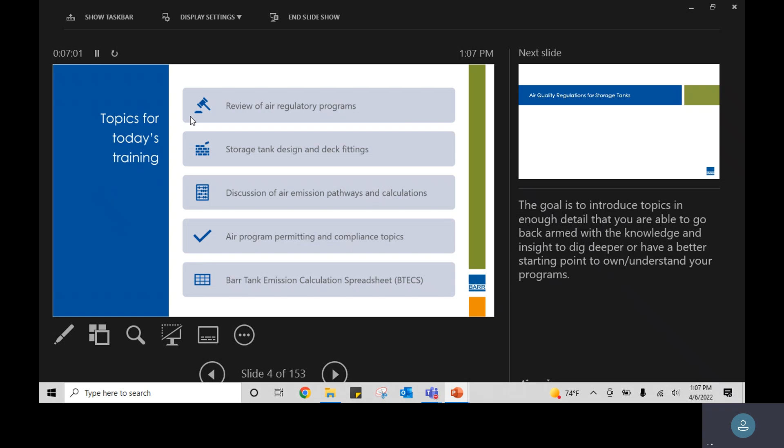So we'll start with a review of the regulatory programs that govern, surround, and impact our storage tanks. We'll talk about storage tank design and deck fittings, dive into the calculations and emission pathways, talk about some permitting and compliance topics, best practices, et cetera. Then to close it out, on the Barr side, we have developed a replacement for TANKS 4.09d, a spreadsheet-based tool to do the latest and greatest AP-42 calculations, and we have that as a resource available to folks if it's something they're interested in. So we'll touch on that quick.

So we'll get started, dive in, and get the regulatory stuff out of the way first. That helps build the foundation for why tanks are designed the way they are and influences the emission calculations as well. So the fun starting point is: are we talking about a tank or a vessel? And what does that mean?

As much of a lay definition or synonym as they may be, that can have significant ramifications regarding the regulatory applicability of programs. We'll get into some of those, but it's important to always read the definitions, understand your regulatory programs, and look for those exemptions.

If it looks like a tank and smells like a tank, it might not be a tank though, if it's a pressure tank or a frac tank. Frac tanks are always curious because they are not subject to NSPS KB, since they have wheels, and as long as you don't leave them in place for 12 months, they're not a stationary source. However, depending on your facility operation and activities, those emissions you still can't ignore. So you may not have a regulatory burden for your frac tanks, but it's still important to understand what those emissions are and what they're being used for.

So anyway, we should always be thinking about, is what we're talking about covered by these regulations. That's the on-ramp to understanding if there's applicability or not.

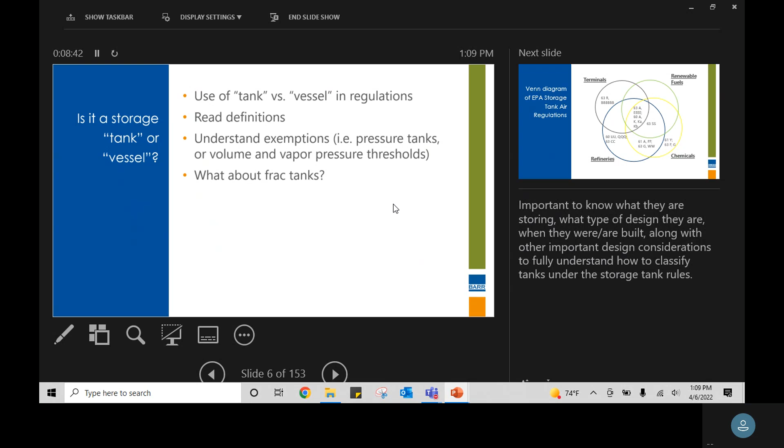From the federal perspective, the rules that cover storage tanks create a very messy Venn diagram. If we look at the different sectors we all seem to operate in, there's a pretty good representation across the board. There's overlap between terminals, renewable fuels, chemical manufacturing, and refineries, particularly from the NSPS perspective, because that's talking about tanks based on size, construction date, and vapor pressure.

And some of the other chemical manufacturing rules, but then there are some terminal-specific rules that deal more with loading operations, and other rules that have more specific refinery impacts for benzene or refinery MACT rules and things like that.

Suffice it to say, tank regulations aren't complex at face value, but as you begin to have overlapping regulatory applicability, there's a need to understand your overlap provisions and whether there are exemptions for being subject to one program or another. Applicability may not be hard for a single program, but it's important to understand where your coverage lies across all applicable potential regulations.

That being said, from the most common perspective, when we think about storage tanks, it tends to be NSPS KB. That's broadly the most applicable standard and does a pretty good job of walking through the standard regulatory requirements for floating roof storage tanks and tanks in general. We'll use KB as kind of a guiding standard to talk through inspections, record keeping, reporting, things like that throughout the presentation here today. But KB is not the only rule that has potential storage tank requirements or standards.

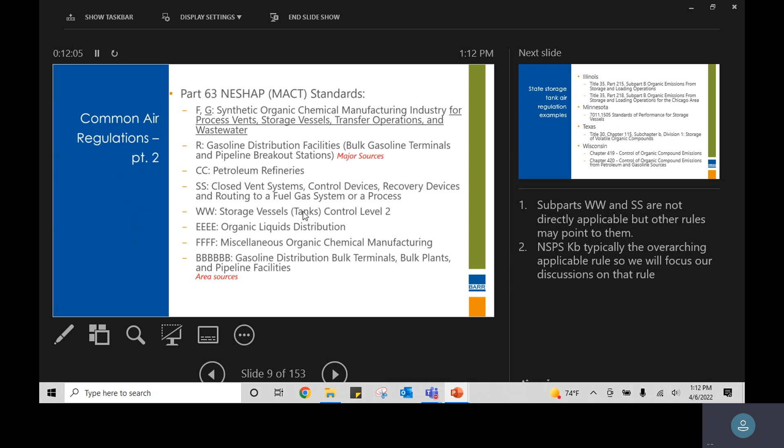And of course, that was all just to talk about the federal level regulations. We can then dive a layer further into our state-specific rules. I am from Minnesota, and Minnesota's air regulations for tanks have a lot of overlap with surrounding states, but there are also a lot of differences. What we often see isn't completely wholly different regulations, but there are some very unique things in different state regs. So let's see if we have a couple examples of that.

So a couple examples. Illinois has a specific standard for vapor pressure for tanks that aren't subject to KB, requiring less than 12.5 psi at a 70-degree reference temperature or something to that effect. So there's a bit of a lesser standard for tanks not subject to the federal rules. Other states like Indiana require your tanks to be painted white. Wisconsin also requires your tanks to be painted white. None of the federal rules have specific paint-related provisions, but those all exist.

Again, this is just a snapshot, not to scare but to inform everyone that, especially if you've got jurisdictions across the country, a lot of your tank stuff may be the same, but there are going to be a handful of nuances you may not expect or be aware of at first. So again, just providing some context and awareness.

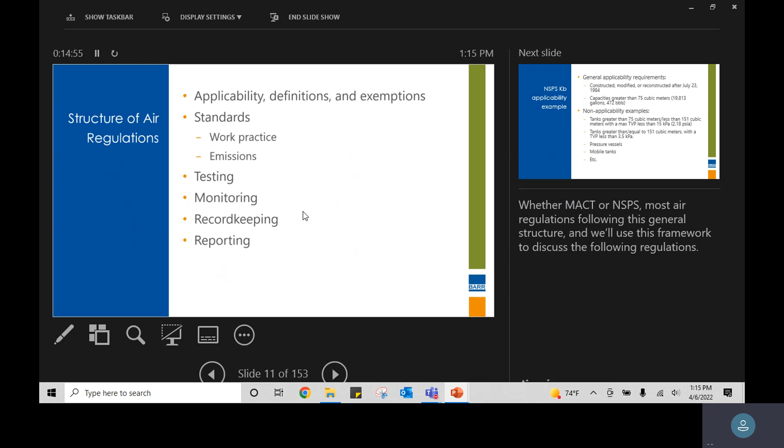And then we've got some testing, monitoring, record keeping, reporting. This is the pretty standard regulatory structure for any given rule, and we'll dive in and talk about tanks specifically. So again, we'll start with KB as a basis.

This is a good one because it has some interesting caveats as well. From an NSPS perspective, we're typically talking about specific pieces of equipment as opposed to whole industry segments like a MACT rule or some of the other rules. So for KB, for example, our general applicability requirements are based on when the tank was constructed, modified, or reconstructed, and its size. Non-applicable tanks would be certain ones that, if within a certain size range and storing less than a certain vapor pressure, or greater than a certain size with a slightly different vapor pressure threshold, don't have the same general applicability requirements as those primary tanks.

KB also has a number of exemptions for pressure vessels, mobile tanks like our frac tanks, and a number of other things based on the text in the rule. There are a handful of other exemptions that exist, but it's important to understand as we get started what fits in the box and what doesn't.

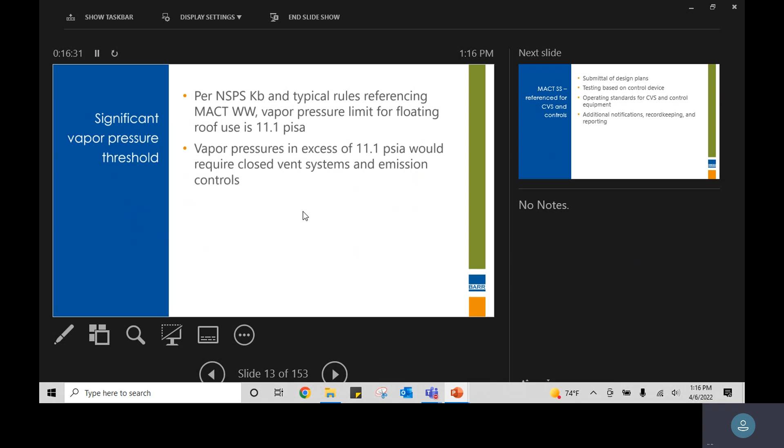The number we'll talk about a lot, whether we're talking about KB or MACT WW, is 11.1 psi for the true vapor pressure threshold. So if our tanks are below 11.1 psi, we can get by with a floating roof as the primary form of control. If we have tanks that exceed that 11.1 psi threshold, that becomes a situation where we need to install a closed vent system and have a control device.

So under KB, if we fall into that area where we have high vapor pressures, there are some additional requirements. The MACT SS has a pretty good example that covers this in more detail, where you have to submit design plans, there has to be some testing, operating standards for the closed vent system and control equipment, additional record keeping, notifications, and reporting for that control equipment. So if you can stay under 11.1 psi, that really creates typically the more straightforward operating scenarios when you don't have to deal with those control devices.

So some other sources of tank requirements beyond the state and federal regulations may be your existing air permits. There may be BACT limits that you take on as part of a project to limit or reduce emissions, to stay under certain significant thresholds, or simply as part of your BACT analysis, you have some additional limits or requirements for your tanks, for control equipment or things like that, that may be above and beyond your rules.

A few decades back, the Storage Tank Emission Reduction Partnership Program came into effect to help address the issue with slotted gauge poles and the issue with the 1/8 inch gap criteria. So that had some voluntary agreements to help control slotted gauge poles or guide poles. And that might be what's driving you to have additional controls on a tank that might not be otherwise subject to a specific standard.

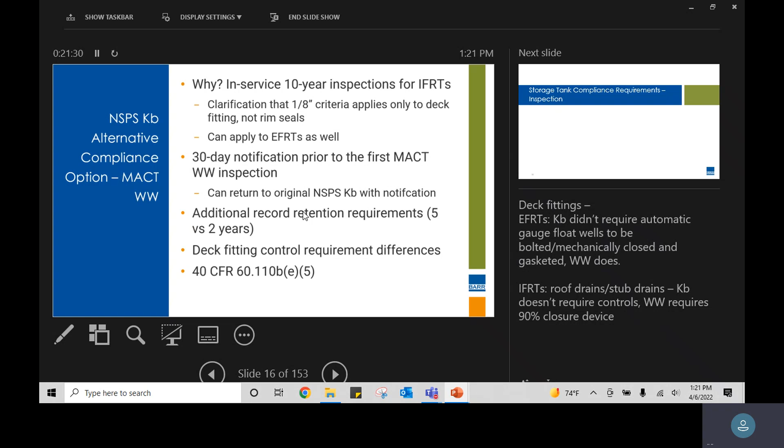Oh, so speaking of inspections, that unique caveat aside, we'll start talking through some of these inspection requirements that our tanks are subject to here. So we'll start again with covering what we look at from an internal floating roof perspective.

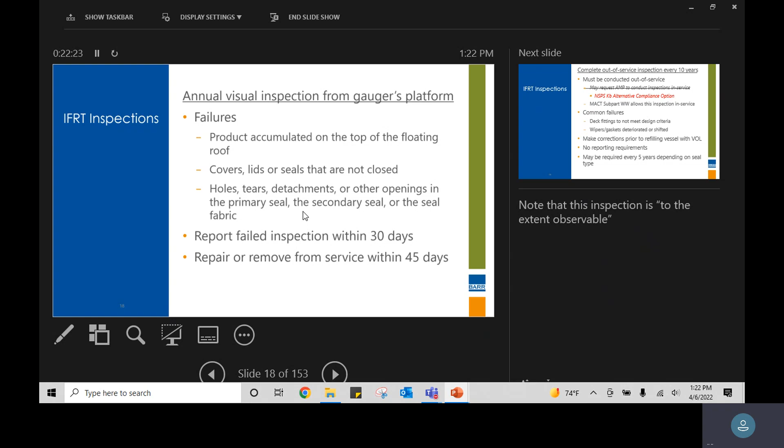I already spent some time covering the complete out-of-service inspection that's required every 10 years. Again, under KB, it must be completed out of service. However, we now have this alternative compliance option that may be a good fit for certain facilities, depending on their safety plans and procedures. And MACT WW—if you have a refinery and are subject to MACT CC and ultimately MACT WW—you now have the coverage to do that in service as is.

So common failures or common issues that we see with these out of service inspections or the 10-year inspections: you may have deck fittings that don't have the necessary controls, or you're missing gaskets, wipers, or other required controls, or they may have deteriorated or worn out and need to be fixed and replaced before the tank goes back into service. You have to fix and repair them before they return to service.

There aren't any reporting requirements for the out of service inspection as it is. If we begin to do them in service, though, then we end up with similar reporting issues and have to fix them within 45 days, or have to take the tank out of service. Certain tanks, depending on their rim seal configuration, may require these inspections on a 5-year basis, but most of the internal float and roof tanks that I'm familiar with typically have the mechanical shoe configuration and are on the 10-year schedule.

So then shifting to the EFRT perspective, we don't have to measure seal gaps on covered float and roof tanks, but for external float and roof tanks, we do measure on a 5-year basis for the primary rim seals, and on an annual basis, the secondary seals, measuring for gaps that exceed certain criteria based on the tank size and diameter.

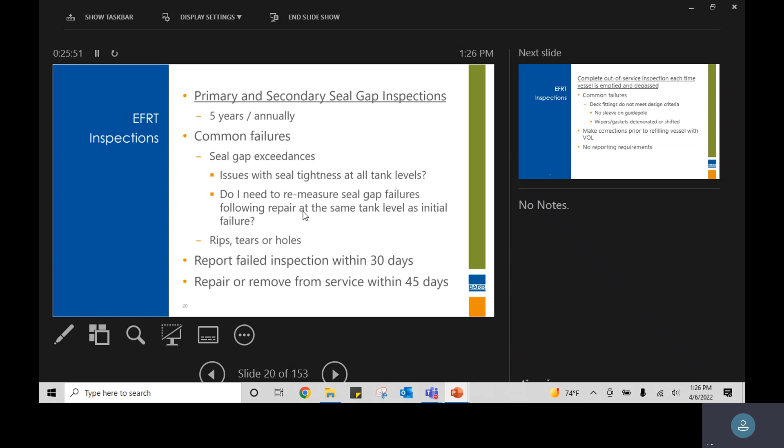Again, for these types of failures, there's a 30-day report notification, and then you have to repair them within 45 days as well. Unlike the IFRTs, we have a requirement to do a complete out-of-service inspection anytime this type of tank or vessel is emptied and degassed. So this is that same inspection criteria as the 10-year IFRT inspection, but for EFRTs, we have the luxury of being able to do it only whenever the tank is emptied and degassed. There's not a corresponding time scale with that one.

So again, deck fittings not meeting the design criteria. Another common one we see here is there's not a sleeve or appropriate control on those slotted gauge poles or guide poles. Oftentimes too, wipers and gaskets will deteriorate over time. They get repaired as part of the API 653 process. Again, have to make the corrections before refilling with volatile organic liquids. And there aren't specific reporting requirements here as well.

So then what do we do if we have inspections, if changing products stored in the tank? If we're talking about things from a refinery perspective and you're potentially changing something from a high volatility material that would keep you as a Group 1 storage vessel under a MACT rule, and you're changing to a diesel fuel or something that's a lower RVP and may not have the same requirements, you may, from a federal rule perspective, be in the clear, but if your air permit still says you shall do these inspections for this type of tank, even if the material has changed, you still may need to conduct those inspections because they're in your air permit.

Okay, so we talked about inspections. We'll jump into monitoring and record keeping for tanks. It's pretty straightforward. The big one is understanding what your tanks are and then what the changes are to them if those changes occur. So KB specifically requires that you maintain records showing the dimension of the vessel and analysis of the capacity of the storage vessel. You need to know what you're storing in there, what the period of storage is, and what the maximum true vapor pressure is during that respective storage period. So again, we want to know how big they are for applicability purposes and when they were built and are they designed correctly.

What is in the tank to do that maximum true vapor pressure test to understand - do I need a closed vent system and control device? If that vapor pressure is going to change and exceed a threshold, you've got 30 days to notify the administrator, and then potentially, depending on what that vapor pressure change is, you'll need to look into those potential additional requirements that may exist. And then for KB purposes, record retention is typically for 2 years. But in the case of dimension of the storage vessels and things like that, those are for the life of the equipment.

So again, true vapor pressure is going to be a pretty significant concept, both from the regulatory side and as we move into the emission calculations as well. There's a couple different categories or approaches to consider when we're talking about true vapor pressure. For crude oils, typically, historically, we've relied on RVP data and the API nomographs to get from RVP to our true vapor pressure. Other liquids, whether it's a pure chemical or things like that, there's standard reference texts for that vapor pressure data. There's a host of ASTM methods for refined products.

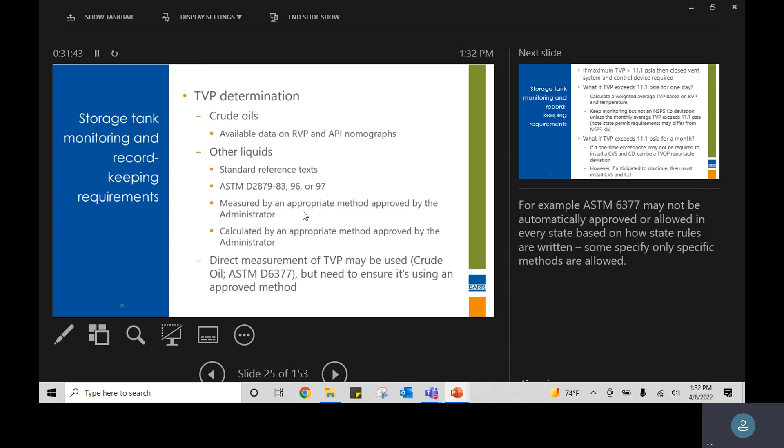So again, we've already talked about it a little bit - if the TVP, the true vapor pressure at the worst case product at your worst case monthly temperature exceeds that 11.1 psi threshold, you're going to need a control device and a closed vent system. The interesting thing from the storage tank KB rules is when we look at the definition for maximum true vapor pressure, they talk about things on a monthly temperature basis. So what happens if we exceed 11.1 psi for one day? That's not directly a KB deviation unless, using your monthly average temperature, you exceed that 11.1 psi threshold. So we have some latitude in the representation and definition of maximum true vapor pressure per NSPS KB rules.

If you're getting close to that 11.1 psi threshold for one day, though, that typically is an unfortunate harbinger of things to come, and you should be having discussions with your product quality groups, whether that's from a pipeline perspective or a refinery perspective, because it gets very difficult to turn knobs quickly to mitigate temperature, thermal issues, and high vapor pressure issues.

From a one-day perspective, it's a great check to have, a good thing to keep in mind. It can ring a bell. But if you have that TVP exceedance for a month, that's when you're exceeding the definition of that maximum true vapor pressure. A one-time exceedance, and a quick caveat: your mileage may vary.

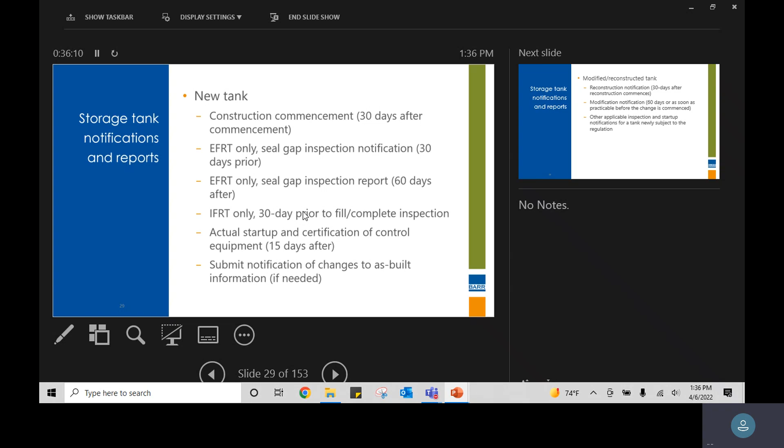So another key thing to note too, from the NSPS perspective, is if your tank is not subject to NSPS KB, we have to be considerate of whether any maintenance projects or construction projects or changes at the facility are going to impact our non-KB tanks. And is that going to trigger NSPS KB applicability by way of reconstruction or modification?

Under Subpart A, there's different requirements for when a modification or reconstruction notification has to be submitted. Also, if you do modify or reconstruct a tank and you have newly applicable NSPS, if you have a tank that becomes newly subject to an NSPS standard, depending on your state, just that on-paper change of becoming subject to a new regulation may mean you also have to go through permitting as well.

So it's important to understand the as-built and as-found condition of your tank and how those changes may impact your regulatory applicability for the tank.

So what about if you're on a tank for a tour with some new folks at your facility, and you see a 6 foot by 10 foot pool of crude oil on your tank roof? It's not your annual seal gap inspection. It's not your annual IFRT visual inspection.

What do you do? For NSPS KB, it's pretty straightforward to follow that 45-day repair window and notification situation. If it's not a KB tank, you may need to check your state rules to see if they have any specific programmatic requirements for addressing issues. You may have some permit requirements as well, again, outside of those regulations.

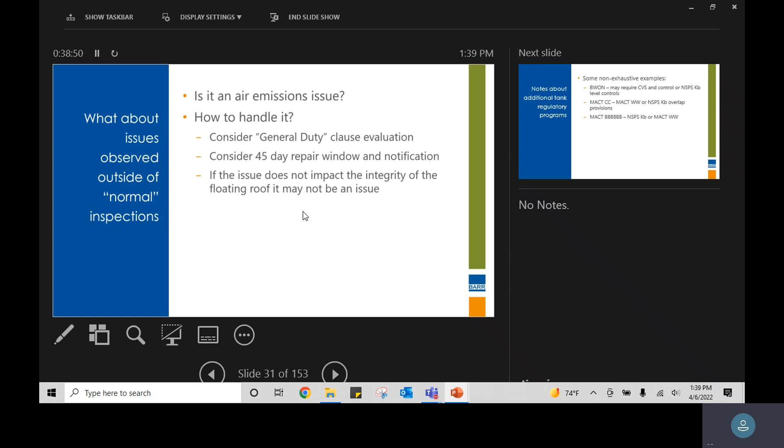A couple other notes - you may remember that very messy, terrible Venn diagram. BWON, MACT CC, and MACT 6B all have some sort of overlap provisions that allow us to look at other regulations, primarily KB, as a way to demonstrate compliance, or if we're subject to KB, rely on that as well. So it becomes a little bit of overlapping spheres of regulations to be mindful of as you evaluate your tank program. Just be mindful there's not just one regulation to consider, depending on the operations you have.

Now we'll get a little out of the esoteric regulatory background and look at what's required on our tanks. An important thing we often see helping clients deal with tank issues is, from the environmental perspective, we have a vocabulary list from NSPS KB that's aligned with AP 42, Chapter 7.1 for emission calculation purposes. We might call certain deck fittings certain things, but our tanks group and folks in the field have different terminology and meanings, so there can be some disconnect. It's important that from the environmental side we understand what's required, and from the operational, physical tank perspective, the folks doing the work are on the same page, regardless of whether we call it a vacuum breaker or a bleeder vent.

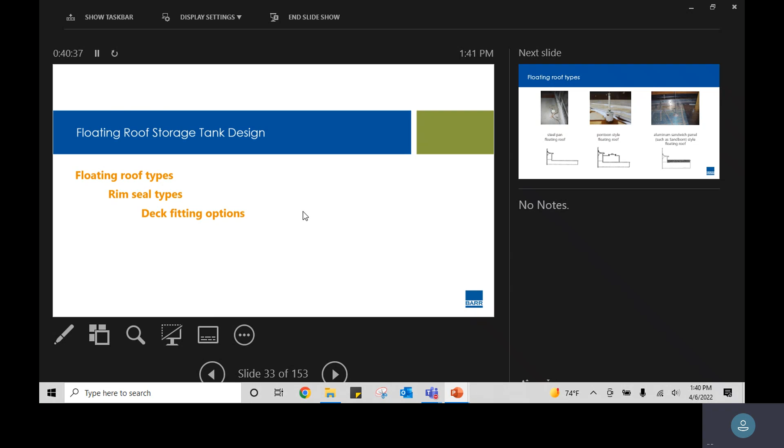So we're looking at floating roofs first - there's a couple different types, and we've got figures from AP 42 to help characterize that. Typically in internal style floating roof tanks we'll see the pan style floating roof - a thin layer of steel with an upturned edge that floats on the liquid. We don't typically see the pan style roof on EFRTs because rain, snow, and precipitation cause significant buoyancy issues and cause those to sink fairly commonly.

More often for external style floating roof tanks, we'll see the pontoon style, which has the annular ring of enclosed pontoons around the exterior perimeter of the roof that help provide stability and flotation. We can also see on internal floating roofs an aluminum sandwich panel style - I believe the trade name is Sanborn style floating roof. That's a thin layer of aluminum, some foam, and another layer of aluminum that floats on the roof. It has a little more rigidity than a steel pan, but not much. It also has some deck seam issues we'll talk about, but it's another somewhat common internal floating roof style.

We've talked about pontoons from an EFRT perspective. There can also be an aluminum skin and pontoon style floating roof on internal floating roof tanks, more like a traditional pontoon boat - it's got the pontoon on the underside of the roof. There's a roof leg, pontoons that sit on the liquid, and actually a vapor space between the liquid surface and the floating roof itself.

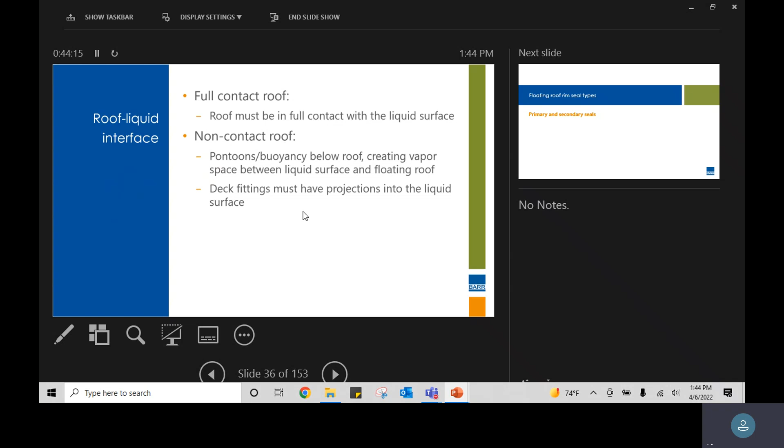So the floating roof's main goal is to minimize the available vapor space between the liquid surface and the floating roof or the atmosphere. If we have a roof where the floating roof isn't touching the liquid, we have a vapor space where VOC concentration can build up and more readily leak or evaporate into the atmosphere. So to address that, you have to have a projection below the roof or below the liquid level. I've got a couple pictures of that coming up here.

So we talked about the types of roofs. Now we can look at the primary and secondary seals that are used to close off the liquid surface from the atmosphere. For EFRTs, we have typically a primary seal and a secondary seal, and that's required under KB to have a primary and secondary seal.

We'll most commonly see mechanical shoe seals. There may be some liquid mounted seals, and we'll have a few examples of those coming up here. The secondary seal effectively closes off or covers that primary seal space, so you have a second layer of protection against evaporation losses from your rim seals.

For internal floating roof tanks or external floating roof tanks that have a dome on them, from the KB perspective, you've got a couple options. You can have a liquid mounted foam or a liquid filled seal. That is, I've heard it best described as a fancy pool noodle wrapped in a resilient film that allows for a little bit of flexibility as the roof goes up and down.

The challenge with those is if your film covering gets ripped or torn, your foam seal can then soak up a whole pile of gasoline or other very flammable or volatile material, and we end up with some pretty significant concerns around safety and/or fire or combustion issues.

And then you can have two seals mounted above each other or a mechanical shoe seal. So for covered floating roof tanks, you may run into a situation where you just need a primary seal to comply with your regulations, but there may be BACT or other air quality program drivers that push you to have more than just a primary seal, or you may elect to take one on as an emission reduction activity as well. So what do these look like?

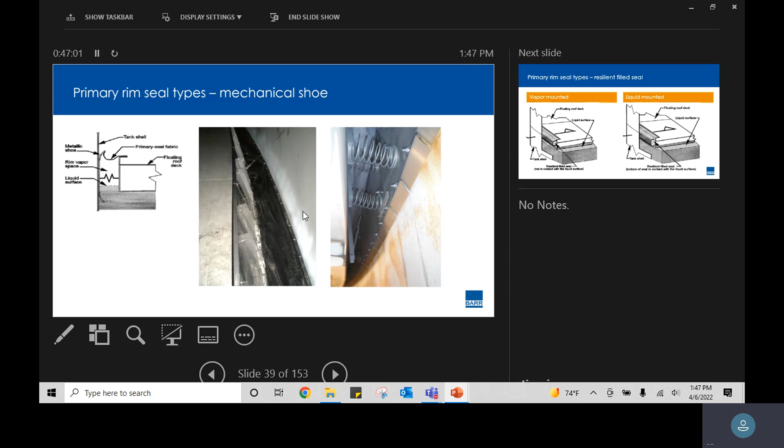In addition to that seal or shoe closing off the space, we'll have a primary seal fabric here that again has the ability to flex as that roof moves up and down. You can see here it's this dark black fabric material that runs along the perimeter of the rim seal. And from underneath, there's typically a combination of springs and other tension mechanisms to keep the mechanical shoe seal flush against the tank shell. So then I mentioned there can be resilient filled seals.

There can be both a liquid or vapor mounted seal approach. And again, when we get to the emission calculations side of things too, we'll see there are some differences in how these seals not just act as a design criteria, but also impact our coefficients for emission calculations. So vapor mounted simply means that the seal is not in direct contact with the liquid, and liquid mounted means that seal is flush against the liquid surface as the tank operates and moves up and down.

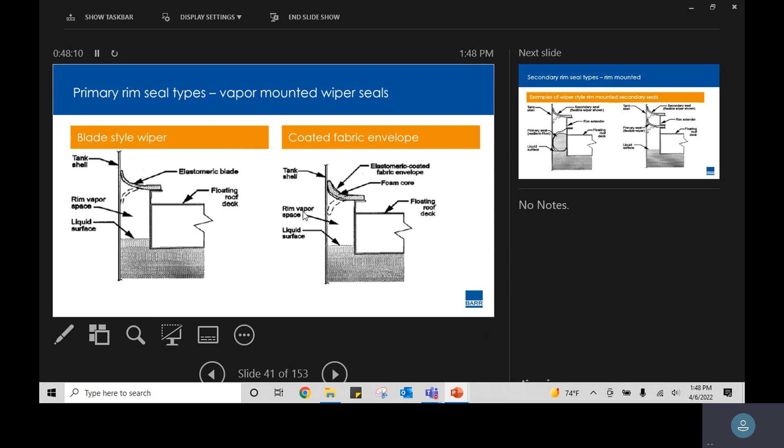So back to the internal floating roof type of tank, we can have a vapor mounted blade or wiper type seal, which is essentially a squeegee that flexes as the tank roof moves up and down. It can be either more of an elastomeric blade or a foam core coated type seal. Different manufacturers have different technologies and techniques, but at the end of the day, a wiper seal is a wiper seal.

Most commonly though, I think, by a quick show of hands, who has mostly mechanical shoe seals on their floating roofs? Yeah, I think overwhelmingly for the general industry, we see mechanical shoe seals as the primary seal configuration.

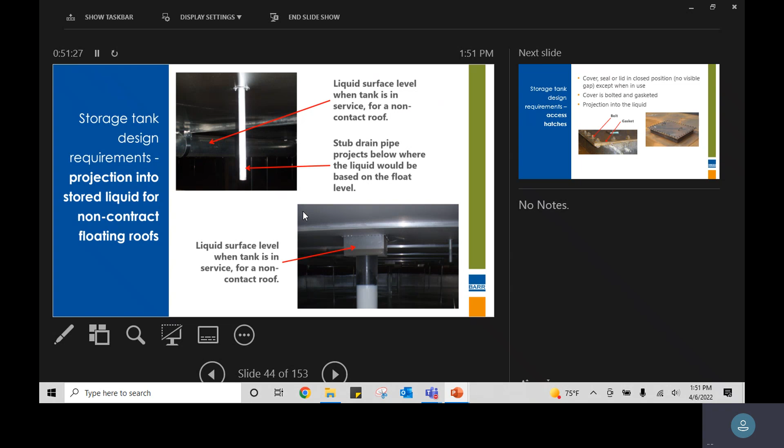So you may recall when we were talking about the floating roof types, we talked about contact versus non-contact. We can see here the pontoon in the background. Here's a stub drain that has, instead of just an opening in the roof, an extension that goes down - the angles are a little funky in the photo, but the projection extends below where the liquid level would be, effectively closing off that opening from the vapor space created underneath the non-contact floating roof. Similarly, for a column support well, there's an extension that provides a protrusion down into the liquid surface so that opening isn't exposed to the entirety of the vapor space.

Okay, so that context aside, we'll now walk through the common deck fittings, understand what the controls or different configurations are, and what those look like with respect to NSPS KB, and then we'll jump into what those look like on the emission calculation side as well.

So most commonly, we've got access hatches. Pretty much everything we're going to talk about will have a bolted or gasketed configuration to, number one, demonstrate compliance with KB, and number two, that affects the emission factor calculations that we do. KB for almost everything requires the covers or lids to have gaskets and some type of mechanical fastening. Additionally, if it's a non-contact roof, there has to be a projection into the liquid. If the roof is in contact with the liquid surface, then we're okay.

So again, access hatches, pretty straightforward. They're used to get above and below the roof when the tank is out of service, not typically opened when the tank is in service.

For our more analog operators, we have the automatic gauge float wells, which are the more old school style of level indicator for tanks. There's a kind of bobber or buoyant flotation device that sits on the liquid surface. As the tank moves up and down, the gauge wire feeds into an analog or digital instrument to tell us what our tank level is. And from the air quality side of things, it's important that we have a cover, a seal, or a lid in the closed position with no gap except when in use, and the cover is required to be bolted and gasketed.

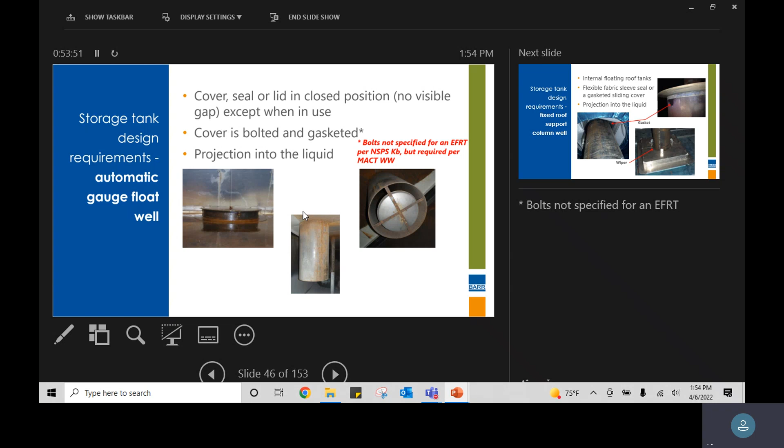Yep, bolts not specified for KB for an EFRT, but they do require them for MACT WW.

So for our internal style floating roof tanks, the roofs can be either self-supporting or not self-supporting. For roofs that aren't self-supporting, we have fixed roof support columns. Tanks can have anywhere between one central column or a dozen or more individual support columns to hold up that fixed roof. Each of those fixed roof support columns creates a penetration in the roof and another potential emissions pathway. So we have to have a flexible fabric seal or gasketed sliding cover, and again a projection into the liquid if it's not a full contact floating roof.

More commonly on EFRTs, we'll see a gauge hatch or thief hatch for grabbing samples and gauging the tanks. There's a couple things to keep in mind. Again, we want to have a gasket on the cover, and it's most commonly going to be somewhere in the lid, but we also want to be mindful of not having a gap between the flange here as well. That's an important item to be mindful of to prevent gaps or issues there.

When we talk about deck fittings in NSPS KB, a good rule of thumb is you want to avoid metal to metal contact. If you have a lid and a closure device, you should have some kind of gasket between there. It's typically required for KB, and also a pretty good practice in terms of minimizing emissions from your tank as well.

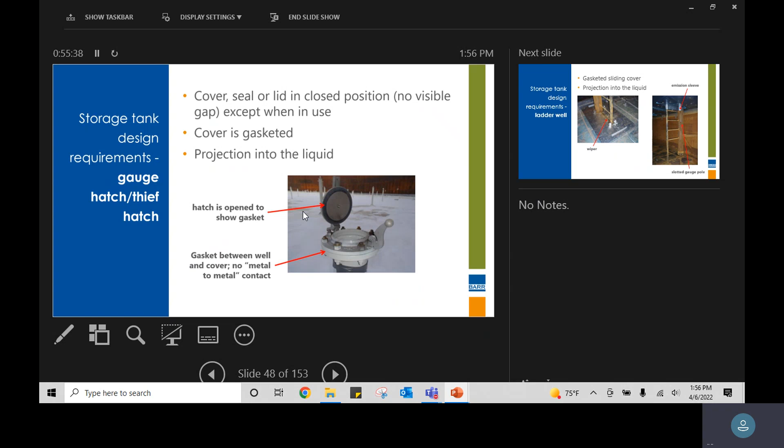So then we've got ladder wells. These are common on internal floating roof tanks. For our external floating roof tank friends, we have a rolling ladder well on top of the roof - that's not an emissions pathway because it doesn't actually penetrate or go through the roof. In the case of IFRTs that have these vertical ladders though, again we have a roof penetration and potential emission pathways we have to be mindful of, and typically they require a gasketed sliding cover.

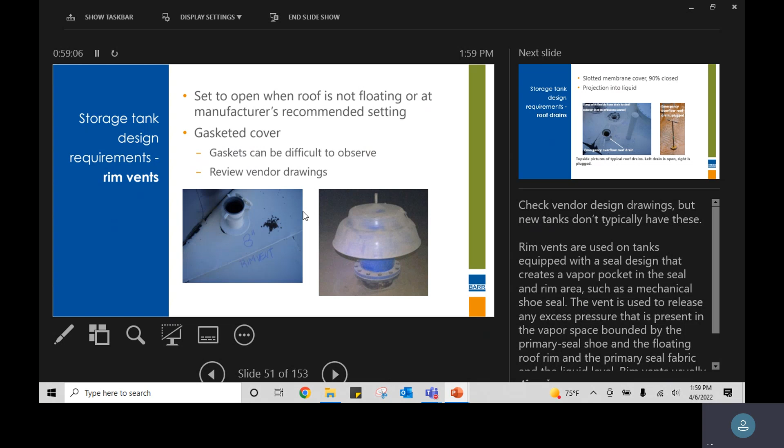Roof drains have a couple different styles or configurations. The controls are typically a slotted membrane cover that's at least 90% closed, or just a plug you can manually open or close. With KB, we typically need to see some type of control on the tank or roof drains. They can't just be an open 3-inch hole in your roof, because that's a pretty substantial emissions pathway. KB doesn't allow openings into the roof except when they're operating.

So the common configuration is just a T-handle plug. Here is actually a sump drain that goes down into a hose system that collects the water and takes it out of the tank without exposing it to the product. And here's an overflow roof drain - it's got a hollow opening but a similar screw handle cover.

Roof legs can be another interesting area. I don't know if most people would consider roof legs interesting, but they can be a unique area to consider when looking at emission representations from storage tanks. There are several API documents that talk about roof leg design and spacing, and within AP42 there are several different roof leg configurations that all have different emission factors. So it's really important when building out a tank in your emission calculations to make sure you're applying the correct representation for roof legs aligned with the type of tank being built.

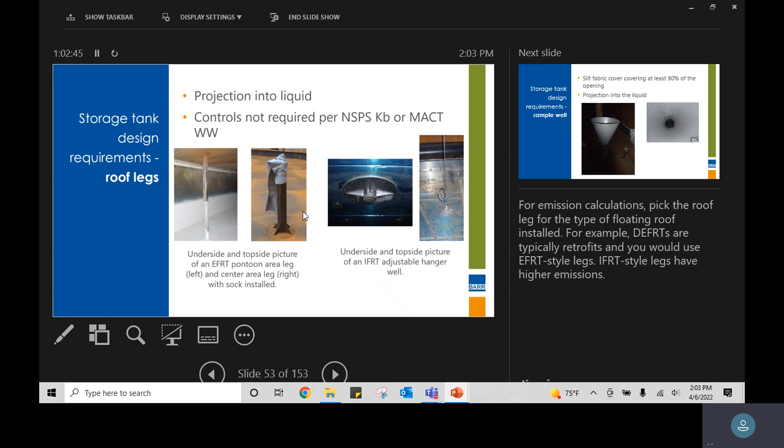I'd say most commonly we see roof legs going down beneath the roof. On some of the lighter internal floating roof style roofs, we do see hanger wells - cables suspended from the ceiling that support the roof, with tensioners that coil the cable as the roof goes up and down. Those are treated similar to internal style floating roof legs because they still end up having a penetration through the roof, creating a potential vapor space pathway.

Another curious fitting we see mostly on internal floating roof tanks is the sample well, kind of analogous to a gauge hatch. Since we can't easily get onto internal floating roof tanks, gauger platform technicians may have a sample cup on a cable that they fish down into the cone. There's a slit fabric seal that generally closes off the opening, but the weight of the sample cup pushes through into the liquid so you can grab your sample and pull it back up. These are required to have 90% cover on the slit fabric opening.

So we've talked about a whole bunch of deck fittings. Perhaps the most complex or most important to get right, from both an emissions perspective and a compliance demonstration perspective, are the slotted gauge poles, also called slotted guide poles or slotted anti-rotation poles. We have several different terms for the same thing depending on how the tank is built, who built it, and who's talking about it.

The slotted poles create challenges with the no-visible-gap standards, and there are a couple of different control options to consider. Typically we see a wiper on the pole. There needs to be a sleeve or float closing off the holes in the slotted pole. The cover has to have a gasket. We need a projection into the liquid if it's a non-contact roof. There should be a cover cap on top of the pole, or there could even be a flexible external fabric sleeve seal. So there are a number of different control categories and requirements, and a number of different ways to execute those.

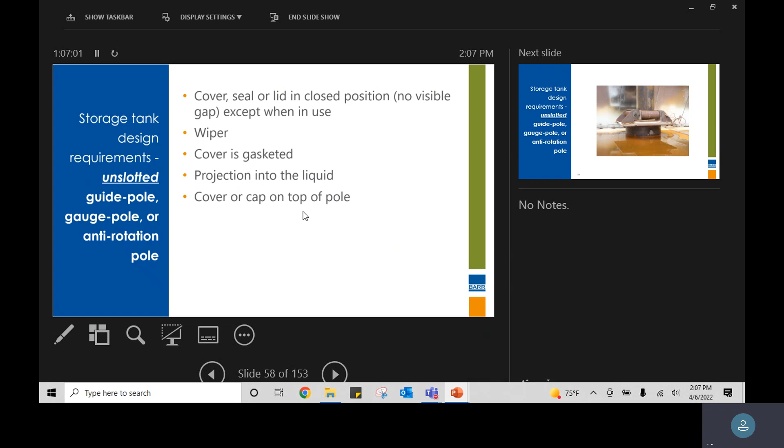Conversely, we have unslotted poles that just require a gasketed cover, a pole wiper, and a cap on top of the pole - a lot simpler because we don't have slots in the poles. They look pretty similar too - we don't see the slots or holes in the pole, but there are still gaskets on the different cover areas preventing metal-on-metal contact. We can't quite see it here, but there's also the pole wiper that helps close off that gasket area around the pole.

Stub drains are generally common just to internal style floating roof tanks. They allow for any precipitation runoff or whatever to get off the roof.

MACT WW requires a closure or cover device. This is a relatively novel technology. There's a little ping pong ball sized sphere that if there was a liquid level buildup on the roof, it would float the ball, allow the material to drain, then close back up, effectively creating 90% closure.

So pretty simple solution to a control requirement. KB doesn't require those controls. Another item to be mindful of if you're looking to use the NSPS KB alternative compliance provision and comply with MACT WW. If you have stub drains, you'll need to get them controlled if that's something you're looking into.

Just a side note, if you find you have those stub drains in order to meet the compliance right away, what we did is we got these cork balls and stuck a wire through them, bent the ends, and it essentially functions as the same thing as that. So if you have those, it's a good alternative you can fabricate up.

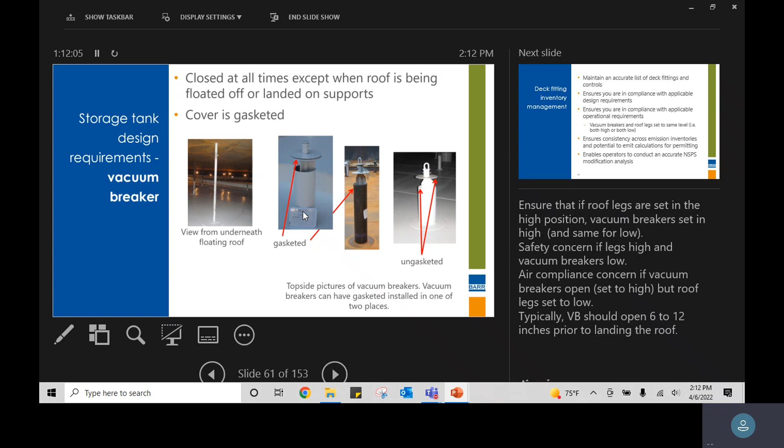But most commonly, I think we typically see these mechanical leg style vacuum breakers. So those are the key or primary deck fittings that exist as laid out in the regulations, as aligned with the AP 42 calculation factors.

A couple pictures, if you're newer to floating roof tanks, good. It's a crash course. I'm sure you've got some inspection files you can look at to become a little more familiar with them.

But the big takeaway here is it's important to maintain an accurate list of deck fittings and controls, for number one, compliance purposes. If you're being audited or inspected, and you've got a variety of non-Kb tanks or non-MACT CC tanks and tanks subject to the regulations, there could be some questions around how do you ensure your tanks are equipped with the right equipment.

Granted, there's also notifications and reports that go in that also assert that, but it's important to know that you're in compliance with the design standards, and in line with operational requirements.

Again, roof legs and vacuum breaker legs need to be set at the same height, or we're going to run into situations where our vacuum breakers are open when they shouldn't be, or more unpleasant, our vacuum breakers don't open when they should. So those are some important things to be mindful of, and they help ensure consistency with emission inventories and potential to emit calculations.

We want to have the same book of tank math for permitting purposes and compliance purposes, and not have different calculation programs to rectify and explain why our standing losses are different for our emission inventory versus our PTE, when they're storing the same product and should have the same design, but they're different. Then it becomes a bit of a challenge to understand what is right, and whether we have the inspection files.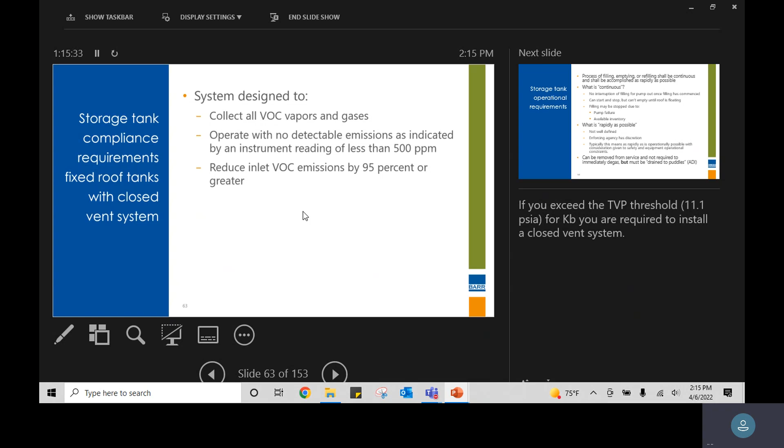From a Kb regulatory compliance side, floating roofs have less direct impacts. You need to have your system designed to collect your vapors and gases. 500 ppm is typically the threshold, and then reduce your VOC concentration by 95% or greater for fixed roof tanks with closed vent systems.

When we're also talking about tanks, again back to our floating roofs, from an operational perspective, we have a couple other things to be mindful of as well. And that is when we land or fill the tank, how we operate this.

This is rooted in operational work practice standards, but then also impacts our emission calculations that we'll get into shortly. Directly from the rule, the process of filling, emptying, or refilling shall be continuous and shall be accomplished as rapidly as possible - a bit of a mouthful, but what it means is when you go to empty or fill a tank, you need to get it done in as short of a time frame as possible to minimize those emissions.

Continuous isn't super well defined outside of a couple caveats here. Rapidly as possible is not very well defined at all, but there's some discussion around that.

So continuous for filling a tank is pretty straightforward - once you decide to float the roof, you're going to begin to put liquid into the tank until that roof floats. Usually it's a couple hours, depending on the size of the tank, the availability of product, whatever. But what we don't want to run into is a situation where you have a tank that's been empty from an API 653 inspection, and it's on high leg roof setting.

So it's got about 6.5 feet of vapor space below the floating roof, and you're going to put the tank back into service. You start to fill and the tank begins to fill and you get about 3 feet of product in there. And for some reason you stop. Now you've got 3 feet of product sitting in the tank, or 3.5 feet of vapor space, and you're emitting pretty significantly during that time period for a couple days until you can get more product in the tank to fill it.

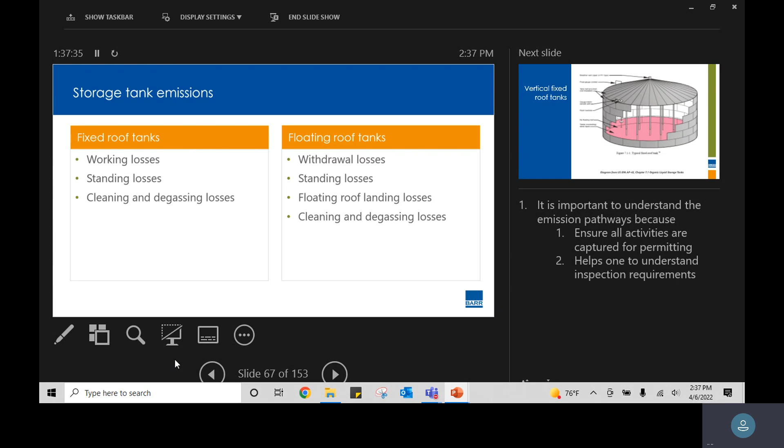It's important to understand the different pathways from the tanks. They're pretty similar, but there can be some subtle differences. Are we talking about inbound throughput for the fixed roof tanks or outbound throughput? Are we talking about incoming or outgoing throughput for the floating roof tanks? So yeah, there's some nuances to be mindful of.

For a fixed roof tank, our liquid level has nothing on top of it. So as product is pumped into the tank, the level goes up, it displaces vapors through the working loss mechanism. Breathing losses, again, as the tank is subjected to ambient temperature and solar gain, it's going to heat up during the day, vapors are going to expand, and it's going to breathe. That will be our standing losses. And then during the night, it cools down, those vapors contract, and the process continues.

For a floating roof tank, the withdrawal losses now—instead of when we put material into the tank and the liquid level goes up, the floating roof rises and covers the liquid—when we take material out of the tank, we're drawing down the roof, the liquid level is going down, but we're leaving a thin film of material along the floating roof interior, and that evaporative loss is the mechanism behind the withdrawal losses. So for a floating roof tank, our major concern is lowering the level of the tank, and the throughput associated with that drives our withdrawal losses, versus the inbound throughput raising the liquid level for a fixed roof tank.

Standing losses here, again, are based on temperature and vapor pressure of the stored material evaporating. Even if we have primary and secondary rim seals, not all seals are perfect—nothing is 100%. So we have some evaporative loss through those rim seals. We have evaporative loss through the deck fitting openings, the roof legs, the vacuum breakers, the access hatches—all that contributes to the overall standing losses from the tank as well. And then, of course, when we land the roof, we have a different emission calculation mechanism to address those types of losses.

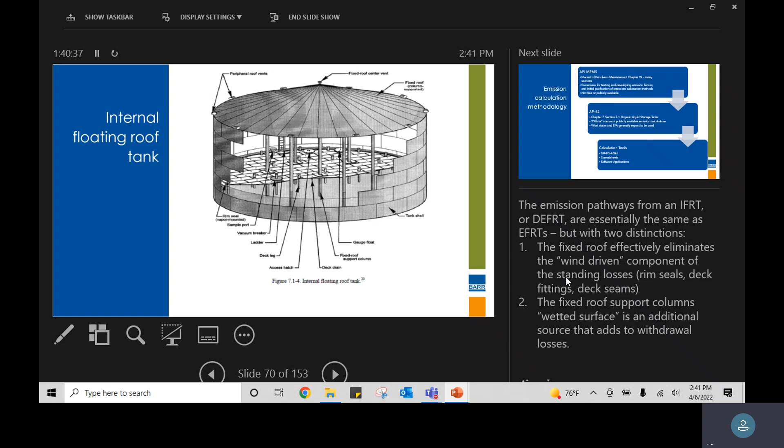A lot of these figures are generally available in AP 42, so they're a little hard to translate on the screen here, but if you have not looked at AP 42 in context or detail, and you're doing tank emission calculations, I won't say it's a compelling page-turning read, but it does have a lot of useful information and context around what these variables are and what everything is used for.

So for a calculation approach or hierarchy, there's a couple ways to think about it. I referenced it earlier, the MPMS, Manual Petroleum Measurement. Still missing the S, but that again is the base document for a lot of the background information that populates into AP 42.

Unfortunately, the API documents are not publicly available. I think a lot of folks typically have access to them through their companies or organizations. If you're members of API, they're several hundreds of dollars a piece, so it's not super costly, but it can add up depending on resources and availability.

You typically don't need them. What I've found from the consulting perspective is they can be useful in providing really in the weeds context around certain derivations for some of the equations and calculations for really in the weeds minutia questions, but for day-to-day emission calculations, if you know what you're doing, they're not needed, but they can be helpful for context and background, especially seeing kind of the changing editions throughout the years.

Those are considered the official source of emission calculations for tanks and a variety of other sources. And that's where all the calculation methodology is laid out, all the equations, parameters, coefficients, etc., for us to then use. And then how do we use them?

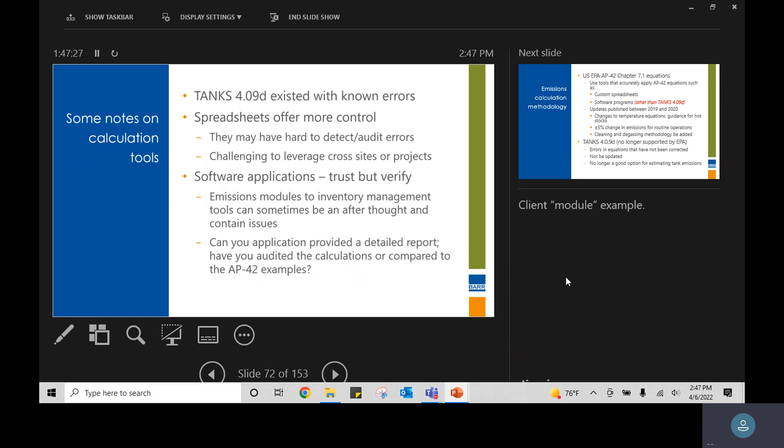So again, AP42, Chapter 7.1, quick takeaways on the calculation methodology: whatever you use, whether it's a spreadsheet or software, validating that it's correct and not just taking the vendor's word for it is important.

The updates published in AP42 between 2019 and 2020, the most significant changes were to the temperature equations for liquid surface temperature and bulk liquid temperature, with different families of equations for different tank types. We'll get into those. There was clear guidance for hot stocks and insulation. The change in emissions for routine operations wasn't significant in that the equations became more accurate and more detailed for specific tank types. We didn't see, for our clients as we helped them update their calculations, a wild change that pushed them into different permit threshold categories for emissions.

But it does have an effect, and if you have tight permit limits or things you're trying to track, it's important to know there will be some amount of change if you haven't already looked at this.

And that being said, the last big note is the inclusion of tank cleaning and degassing emission calculations, which is a bigger deal outside of Texas, where folks may not have been readily tracking or paying attention to those because regulations didn't exist that directly covered those things. Tanks 4.09, if you're using it, stop—there are a lot of other options that are more correct and better. Just a quick warning there.

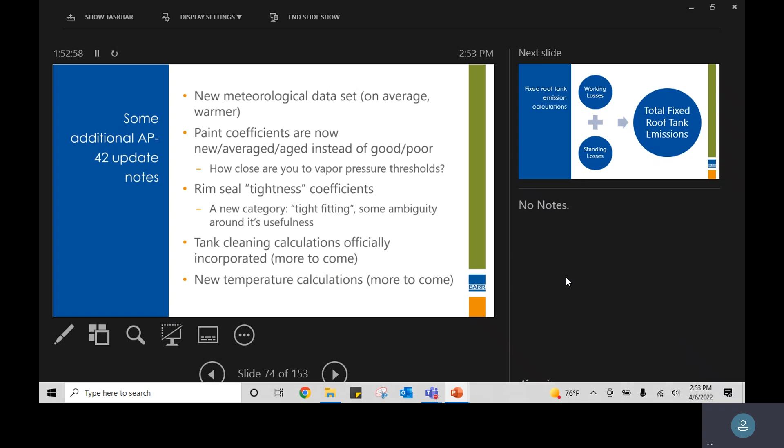Additionally, there's the tank cleaning calculations officially incorporated into the methodology, and the new temperature calculations, which we'll dive into here. So for a fixed roof tank, we talked about working losses and standing losses. Those are our total routine fixed roof loss emissions. Standing losses can sometimes be called breathing losses as well.

Here is my one gratuitous figure. We will be diving into the calculations. The note here is we have less than half of our afternoon left, so I'm going to cover things from a high level, enough to be dangerous and know where the key variables are, but we're not going to dive into all of the equations, because I think we'll want to go have some fun at some point this afternoon. I could stand here talking, but let's not get too caught up there.

So anyway, fixed roof tanks. This is the standing loss equation. There's a number of variables, but we're interested in the temperature, the vapor pressure, the size of the tank. All of these factors play into it. It's straightforward algebra, but there are a lot of sub equations that take into account essentially the vapor density and the mass of the vapors in the tank that are being displaced during that diurnal temperature change.

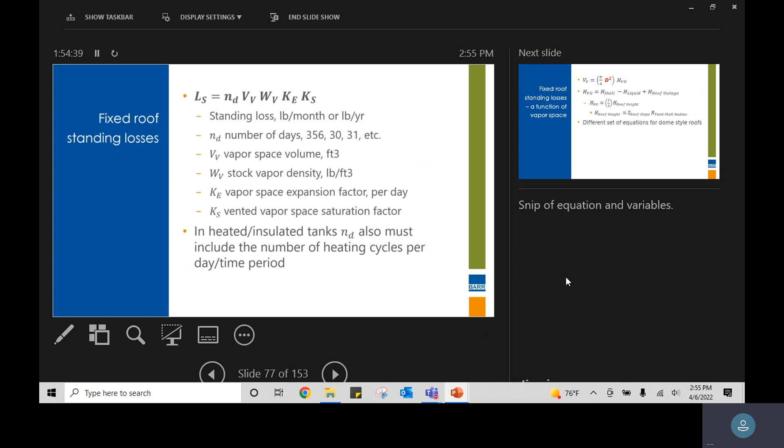An interesting note is if you have heated and insulated tanks, that number of days in a month or in a time period of a year changes to the number of heating cycles that you have that drive that tank temperature change, that delta that creates the breathing losses from that tank. So we'll cover some of these factors that go into the standing losses.

So we're curious, we want to know what the vapor space of the tank is, and that's primarily a diameter-driven number, right? We have a big cylinder, what's the volume of the cylinder? We also know how big the shell is, what the average liquid height is. We also add the volume of the roof. We get essentially our volume, or vented vapor space, which is the amount of space that can be displaced to create our emissions.

This is for a cone style roof. There's a different set of equations for a dome style roof because we have a slightly different geometry. We were talking about vertical fixed roof tanks mostly, but there are also horizontal fixed roof tanks.

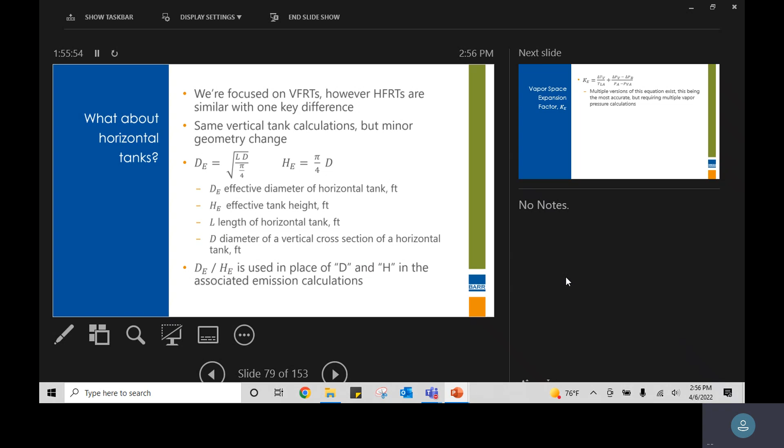We flip it on its side. The mechanisms are the same, but instead of using diameter and height directly, we calculate an equivalent diameter, effective diameter, and effective height based on flipping that cylinder on its side, and use those in place of the diameter and height in the associated equations. So it's important to be mindful of the configuration of the tank and what the appropriate diameters and heights are to use. We're looking at the geometry a little bit differently.

So then we've got the vented, or the vapor space expansion factor. This is doing the math around that diurnal temperature change, or the change in vapor pressure based on the heating cycles. We're looking at what our change in vapor temperature is, what our change in vapor pressure is. If we have any vents, that's what the PB factor is for, and understanding what that expansion factor is going to be for the vapors in the tank.

So here's where we start to get into some of the fun stuff with the changes to our temperature equations. And the biggest one is the fact that almost all of the temperature equations no longer use a default shell height over diameter ratio, but rather incorporate the specific, more accurate calculations into the methodology. This allows us to be a little more accurate in the tank emission calculation realm. The logic behind it is that the computing power of desktop computers has increased such that adding a bit more complication to our equations won't appreciably impact the time or computing power, and it allows us to be more accurate.

So we no longer have a default HS over D ratio, but we can look at our tanks and put in the specific numbers to get more accurate temperatures based on different calculations. Again, the alpha is the solar shell paint absorption, which I spoke on earlier - the new versus average versus aged tank stuff plays into here, so that has an impact on the temperature equations.

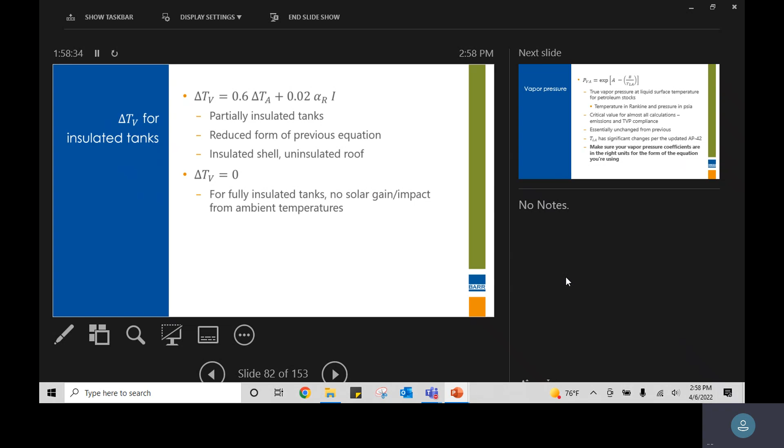So the big one we talked about from a compliance perspective, and are now diving into on the calculation side, is the vapor pressure - the true vapor pressure. For our emission calculations, as well as TVP compliance, we are concerned with the true vapor pressure at the liquid surface temperature. So we have a bulk temperature, which is the common temperature most people think about, but what we're really curious about is that interface between the liquid surface and the atmosphere - the liquid surface temperature - and that's what we use for the vapor pressure calculations.

So here is just the most basic form in AP42. We're looking at temperature in Rankine and pressure in PSIA. This is probably one of the most important equations because the vapor pressure numbers get used in pretty much all the math for all the emission calculations. The A and B coefficients are vapor pressure coefficients, typically from AP42 or other sources that we can then use to calculate our emissions.

It is very important that you're cognizant of, if you're grabbing vapor pressure coefficients from different sources, what those pressure and temperature units are, because there's a variety of these coefficients published in different sources that may have temperature in Celsius and pressure in some other metric unit. It's important that you're comparing apples to apples in terms of vapor pressure coefficients and units - otherwise that will skew your vapor pressure calculation.

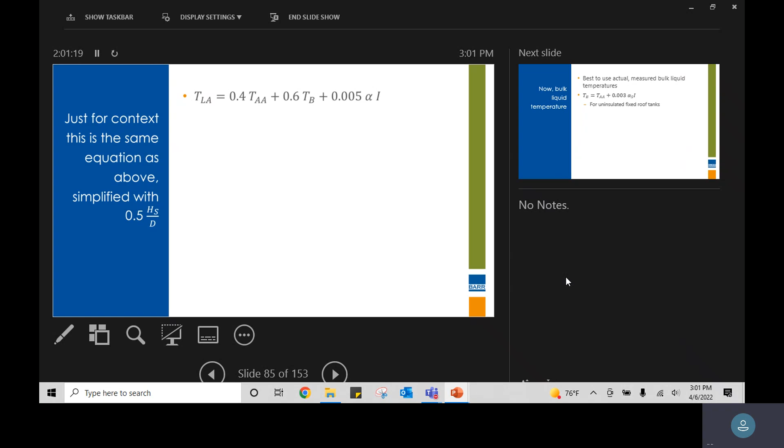So again, AP42 doesn't disallow you, but if you want to use a default or assume a default ratio, this equation simplifies down if you assume the default HS over D ratio. It can be a bit of an algebraic mountain to look at first, but it ends up being not too terrible. Really, how we specify or set up our calculations, the best way to do it is to look at what your actual HS over D ratio is, especially if you have oddly sized tanks - that's going to skew things a little bit. If you've got tall, skinny tanks versus larger, shorter tanks, it's important to understand what that difference may be.

Okay, so bulk liquid temperature. Here, the best guidance, best practice is to use actual measured bulk temperature. If you are a pipeline facility, you may have stuff coming in from your pipelines that are above ambient temperature. If you are at a refinery or a chemical plant, you may have stuff coming off a process unit at an elevated temperature. There are equations that relate ambient temperature to bulk liquid temperature if you're assuming your tank is an ambient temperature tank, which is not a terrible assumption to make, but it's also important to verify or confirm that that's the case. And if it's not the case, then you want to be using those elevated temperatures correctly, because that also plays into your vapor pressure determinations and making sure that you don't have a compliance issue as well as an emission calculation issue.

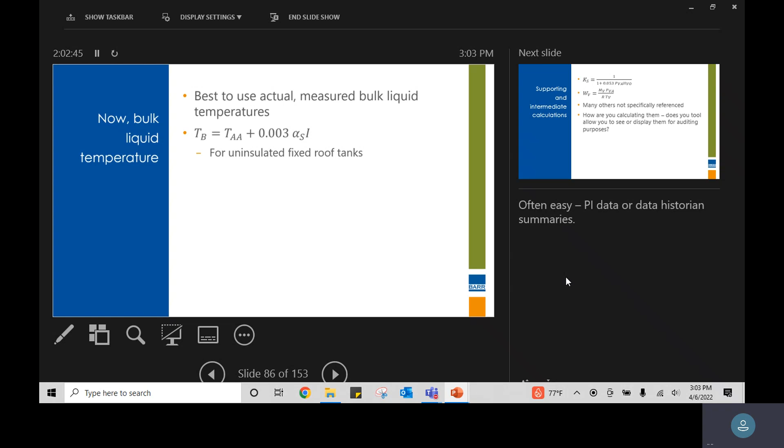So for fixed roof tanks, there's just a simple equation that relates the ambient temperature to the bulk liquid temperature for uninsulated fixed roof tanks. There's still a couple other intermediate calculations that we didn't touch on yet. There's the vented vapor saturation factor, as well as the vapor density factor that again are dealing with converting the concentration of vapor in the vented vapor space into a mass number to get us actual pounds of emissions. There's probably a few other referencing calcs that I didn't touch on here specifically, but again, looking at just this quick smattering of the standing losses for fixed roof tanks, there's a number of calcs that lead up to getting your right numbers. Are you able to easily audit or verify what those intermediate calcs are before, if you have any questions?

And an interesting one that we're seeing more of isn't necessarily driven by regulators, isn't necessarily driven by environmental department audits or things like that, but we're seeing more questions. Our clients are being asked more questions from their ESG teams as people are trying to understand, audit, and verify that all emissions are calculated accurately, and is there a way to reduce or minimize those?

And for tanks, the best that we can do is show and confirm that they're being done correctly. Because again, our tank emissions are vapor pressure, temperature, tank size - kind of difficult to control or turn the knobs on. But again, having transparency in your calculation methods is very important. Probably a theme I will overstate as we continue to go through the stuff here.

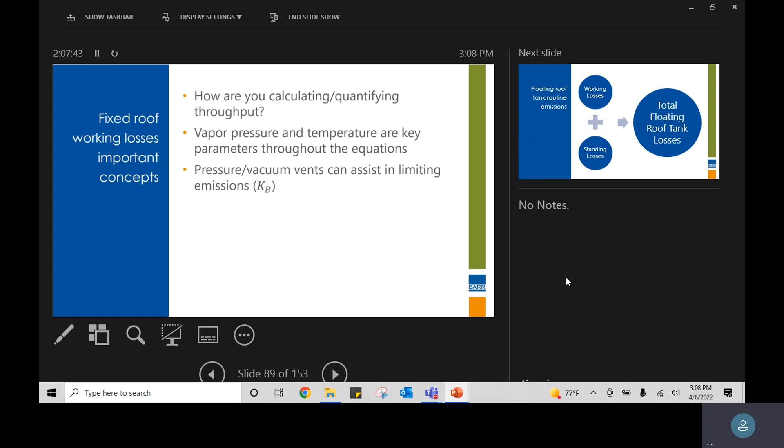So that is a crash course on the routine losses from fixed roof tanks. When we switch gears to our floating roof tank world, the terms are pretty similar. We've got working losses or withdrawal losses based on throughput, but now we're shifting to being interested in the outbound throughput, or throughput associated with a negative roof level movement, and our standing or breathing losses are a function of just material being stored in the tank. Working losses are also often called withdrawal losses.

For the withdrawal losses, as I mentioned earlier, we're concerned not only with the throughput, in this case Q, but also the number of fixed roof support columns. For all of the losses for a fixed roof tank, those are essentially vapor-based. When we look at losses for a floating roof tank, the withdrawal losses are actually based on the liquid properties, not the vapor properties.

Specifically, we don't see our friend TVP or PVA showing up anywhere here, but rather we're concerned with the withdrawal or net throughput, and net throughput associated with a downward roof motion, a clingage factor based on the product, the average liquid density of the material in the tank, a unit conversion constant, the fixed roof support columns again to get that wetted perimeter in addition to the internal shell of the tank, and then the effective column diameter of that fixed roof support column. So this, of all the equations, is not directly influenced by temperature or vapor pressure.

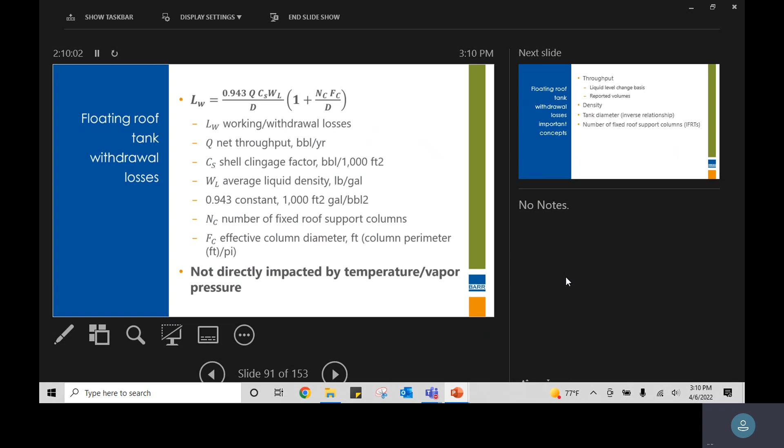So again, throughput, we're concerned with the downward roof motion, the density of the material, and the tank diameter—as we have a larger tank, we have less potential downward motion. The number of fixed roof support columns is also important for working losses or withdrawal losses for floating roof tanks. Whereas fixed roof tanks had one breathing loss or standing loss mechanism, for floating roof tanks, we have three.

All of the things on the floating roof can and do influence or create a pathway for vapors, whether it's the deck fittings, the rim seals, or the deck seams.

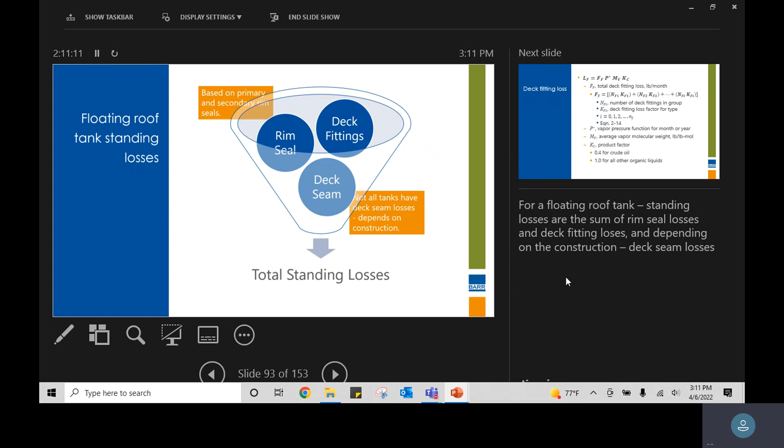So rim seals are based on your primary and secondary rim seals. Not all tanks are going to have deck seam losses—this is if you have a floating roof that's not welded. A welded tank or welded roof doesn't have any pathways. The Sanborn style floating roof, the aluminum sandwich panel style floating roof, anyone that's not welded, that's either bolted or fastened, will have deck seam losses that contribute to these standing losses from the tanks.

So for deck fittings, what we end up doing is calculating a total emission factor for all of the deck fittings on that specific roof. That's based on individual factors for each type of deck fitting, based on whether it's gasketed or ungasketed, bolted, unbolted, etc. So we look at the number of deck fittings in a certain group, what those factors are for those individual types of deck fittings, calculate a vapor pressure function for the month or year depending on the time scale we're looking at, get a molecular vapor weight, use a product factor, and that gives us the deck fitting losses for the access hatches, gauge hatches, etc.

So this is the final end-all be-all equation. Like I was mentioning, each deck fitting effectively has its own individual emission factor that gets rolled up into the parent total deck fitting loss factor.

The one item to note here for an IFRT versus an EFRT is the KV term, which is the wind speed correction factor. If we have an EFRT, it has been empirically derived as 0.7. If we have a covered floating roof, that goes to 0, because the function of those covered floating roofs is to mitigate wind-driven loss effects. The wind speed goes to 0 in that term as well.

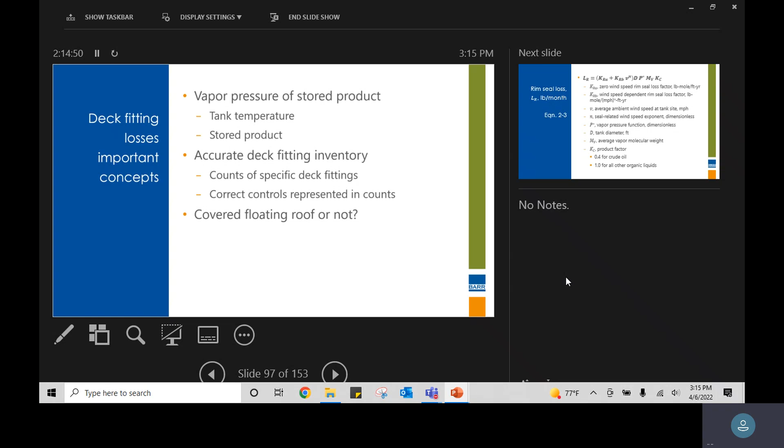Rim seal losses are pretty similar to the deck fitting ones, but instead of being concerned with each individual type of deck fitting, we're concerned with the size of the tank. Similar to the deck fittings, we have coefficients for the different types of rim seal configurations based on whether you have a welded tank or a riveted tank, and what those seal coefficients are that then feed into this equation for developing the losses for the rim seal, or rim seals, on your tank.

What we've seen show up a couple times throughout these equations is the vapor pressure function, and this is kind of an interesting one that was empirically or theoretically derived to support the vapor pressure emissions relationships in the corresponding loss equations. There's some more background in the MPMS documents, but this is effectively the relationship between the ambient pressure and the pressure of the stored material to get our equations to work correctly for the losses, and it's used throughout the equations we've been looking at here.

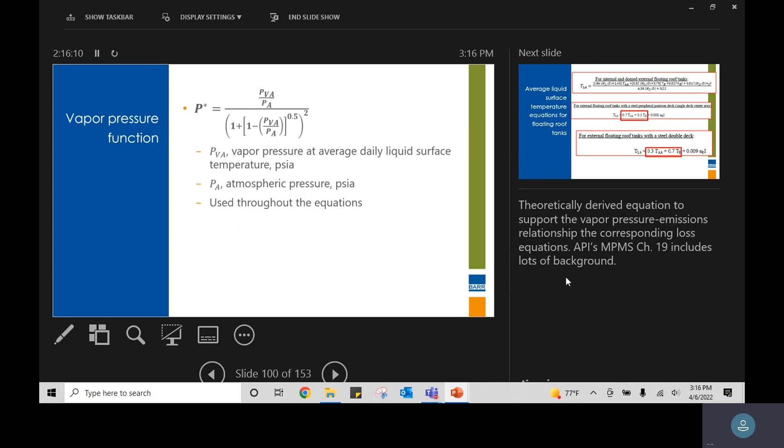So now for our floating roof tanks, here's where we get into the weeds on everything. For domed and internal and domed external floating roof tanks, the liquid surface temperature is approximated based on an equation using our friend the HS/D ratio, to accommodate the most accurate representation of a liquid surface temperature.

This is because there's significant effective insulation, or minimizing effects of solar gain, from the covered roofs. If we look at an external floating roof with a steel peripheral pontoon deck, single deck center area—so we've got the ring of pontoons around the outside of the deck, and then just a single sheet of steel on the inside—there's a pretty significant weight difference to the ambient temperature versus the bulk liquid temperature. And then almost flipping completely, if we're looking at an external floating roof tank with a steel double deck roof, those coefficients almost effectively flip, in that the liquid temperature of the stored material overwhelmingly influences the liquid surface temperature versus the ambient temperature.

Whereas in a steel pontoon traditional style floating roof tank, the ambient temperature far outweighs its influence on the bulk liquid temperature.

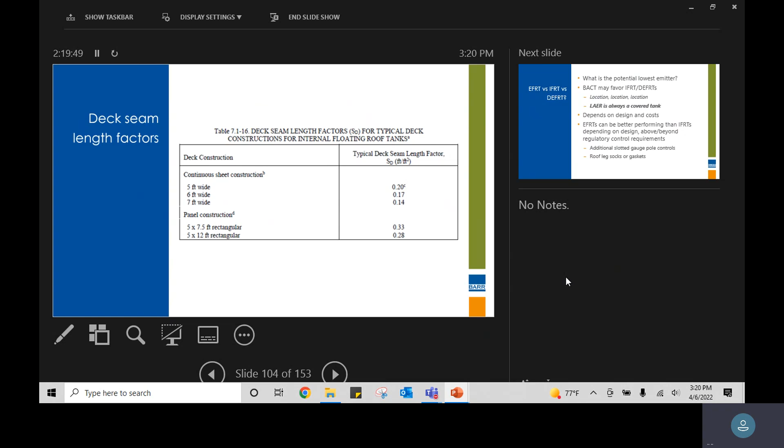And we use our friend, the vapor pressure function P star, molecular weight, and concentration and saturation factors. There are a couple default representations for deck seam lengths and factors in AP42 to pick what best represents your deck seam representation for your tank, and then that will work back into the calculation, and you'll get your deck seam losses to get added to your deck fitting losses, to get added to your rim seal losses, and now we have our standing losses from a floating roof tank.

Okay, so we have covered a number of calculation mechanisms for routine emissions. What is the lowest emitter? Depending on what you are - if you're evaluating a project, helping folks scope a project or design a project - what are some important considerations? What is the lowest emitter is often the big question that comes up. And...

It depends. BACT often favors a covered tank that eliminates the wind-driven effects. But depending on your design criteria and other things, you may be able to show that there are EFRTs that are better performing than covered floating roof tanks, because you're adding flexible enclosures onto the slotted gauge poles. You might have roof leg controls or other things, coupled with, when we talk about BACT, there's a cost component and technological feasibility component as well. So from the BACT angle, we have some opportunity to represent tank emissions or to show that EFRTs can be well-performing tank types.

However, if we're in a non-attainment area and subject to LAER, lowest achievable emission rate, that is always going to be a covered tank as well. So we don't have the ability through the BACT cost effectiveness and technological feasibility evaluations to show that we can design a low emitting EFRT. So, outside of LAER, there's cost and design constraints to be mindful of, but it may not always be as straightforward a question as whether a covered tank is the lowest emitting tank or not.

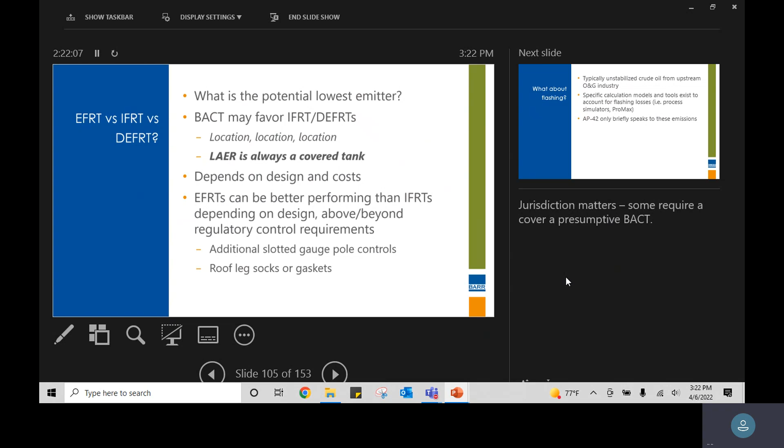A final note too - jurisdiction, as with all air quality things, does matter. There may be some states or locations where even if a traditional BACT analysis may show that an EFRT makes sense, jurisdictional standards may dictate that it has to be a covered tank anyway. So just some things to be mindful of.

One thing that we have not touched on that fits into the routine losses is flashing emissions. This is more for our upstream friends - I don't think anybody here is appreciably on the upstream side of things. That's where we're seeing unstabilized crude from production well areas. It's been effectively, it hasn't been stabilized, so it's got high volatility, light ends, etc. And there's going to be flashing that happens when you go from a high pressure to a low pressure situation.

And there are specific calculation models and tools that exist - ProMax is one that our natural gas folks often use. You also have to have specific composition data as well, so it's pretty complex. A little bit outside of our purview today, but just wanted to speak to it. AP42 mentions that flashing losses exist and not to forget about them, but doesn't go into significant discussion around what to do other than using an appropriate simulation tool and appropriate data.

Okay, so we have covered the routine emissions, and now we'll shift gears into the non-routine, and that's going to cover the floating roof landing and refilling events, and then also the tank cleaning events as well.

Floating roof landings and refillings obviously apply to floating roof tanks and not fixed roof tanks. Whenever the tank is in service, the calculations we just talked about are appropriate to use. When it lands, we end up shifting our calculation methodology because the tank effectively becomes a small fixed roof tank, because that liquid level has separated from the floating roof. So when does this happen? If the tank is removed from service for an API inspection, if you're doing a service change, if you have to fix a mixer, you might land the tank for a day to pull the mixer and put a new one in.

Conversely, when we land a tank to do something, we're typically going to put it back into service. That's when we'll have the refilling emissions. The tank is put back into service from a service change, it's filled for the first time, or you're returning to service after some other event. We have a different emission methodology because the floating roof is no longer acting as a control device. So we've got different methods, and oftentimes this is going to result in significantly more emissions too, because we've got effectively open vents and no passive control.

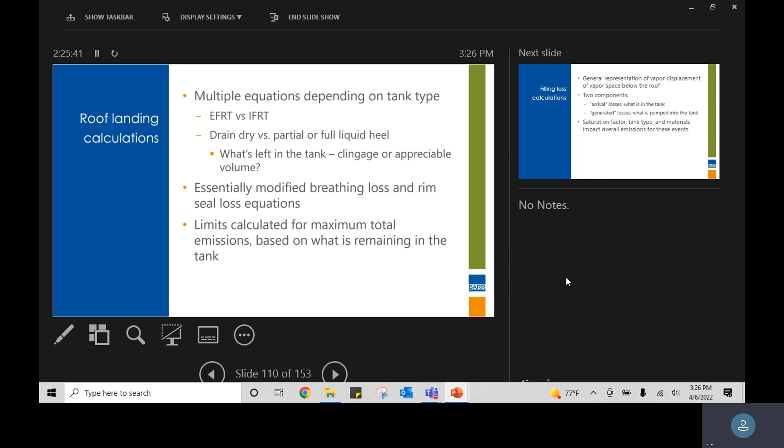Effectively, the equations become modified breathing loss and rim seal equations. We also calculate limits for a total maximum emission based on the landing events, and that's based on what's left in the tank, whether it has a partial heel or a full liquid heel, or if it's drained dry. Those impact the standing loss calculations. I'm not diving into these ones specifically. They're within AP 42, and like I said, we have essentially modified breathing loss and rim seal loss equations for the tanks. The filling loss is essentially we're displacing the vapor space below the floating roof.

There are two components to be mindful of. There's the arrival loss, and that's effectively what's in the tank that's being displaced. And then there's the generated losses, which are generated by the material going into the tank and saturating that vapor space as well. And these, again, are similar to the fixed roof tank equations that we've already covered. Again, saturation factor, tank type, and materials impact the overall emissions for these events.

So what are the important variables from a landing or refilling calculation? The number of days. Did you have your tank sitting on legs with a foot of product for 1 day, 2 days, a week? Was it drained dry? Again, just a quick note, your refilling, your floating, must be accomplished as quickly as practicable. The filling loss equation doesn't actually have a time component. It's assumed that when you're filling the tank, you're doing it relatively quickly and you're expelling effectively one vapor space worth of material from the tank.

Are you keeping records of your landing events, both planned and unplanned? That's getting back to, again, some compliance concerns. We want to make sure we have an understanding of when our tank does land. Do you have any other compliance limits on your non-routine activities? Some folks have emission limits. Other folks have limits on the number of events that they can do when they land a roof.

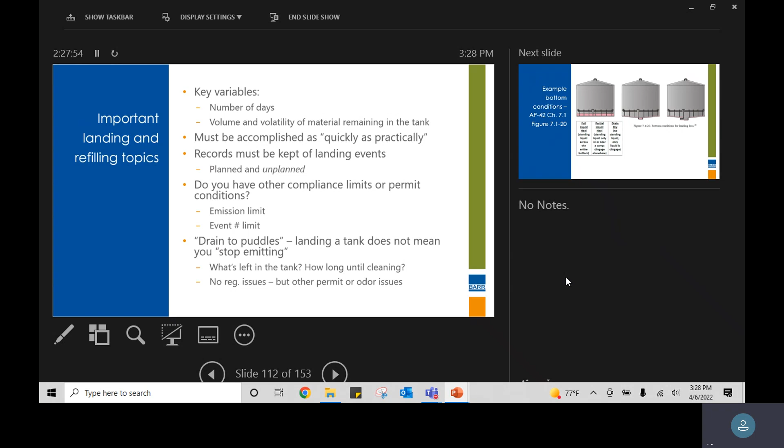And so then, finally, right, we have the drain-to-puddle statement. Landing a tank does not mean you necessarily stop emitting, right? Because you've got these landing losses. But if you can achieve a drain-dry configuration, your emissions will drop off pretty quickly. But then even if you're not having a significant emission rate, how long until you're cleaning the tank? Are you going to have odor issues with your neighbor? Again, when you're taking a tank out of service, you want to have a plan in place to mitigate and manage those bottoms if you're not able to drain the tank completely and then start cleaning right away.

Just for context too, when we talk about drain dry tanks, we have just a little bit of clingage left in the tank, nothing in the sump. A partial liquid heel means there's a little bit of material left in the tank and some oil in or around a sump area. And a full liquid heel is freestanding liquid across the bottom of the tank. Those configurations get worked into the landing and refilling calculations depending on the type of tank that you've got.

Landing and refilling emissions have generally been around since 2006 in AP 42, but the big change, or at least the really new or potentially interesting, controversial inclusion is the tank cleaning and degassing emissions. Not controversial in the sense that they should be accounted for, but interesting or challenging in the way that they are to be quantified.

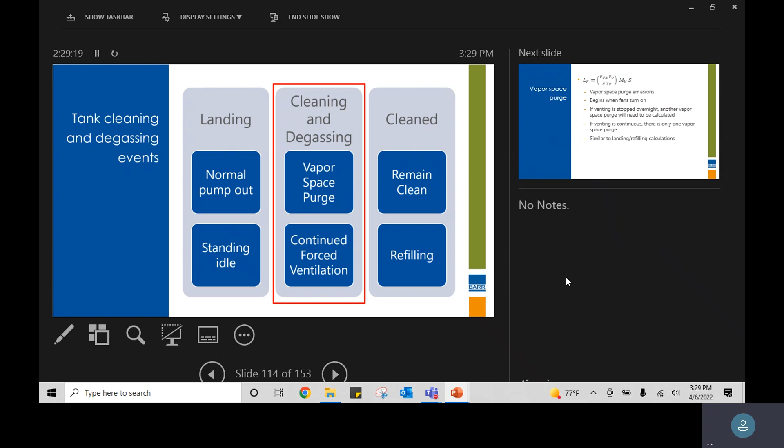There are two main components from the AP 42 representation of the cleaning and degassing emissions. The first is the vapor space purge. So when you begin your tank cleaning process, you're going to turn on some fans or blowers to get things moving out of the tank. And then you've got your continued forced ventilation. As those fans are running, as you have crews in there cleaning the tanks, we'll have continued emissions from that process. So what does that look like?

The initial vapor space purge is effectively when you turn on the fans, you have a displacement of highly concentrated vapors. There's not a time-driven component here, but again, we're looking at the vapor space under the floating roof, the temperature, ideal gas constant, vapor pressure, molecular weight, and the saturation factor. So when you turn on the fans, effectively, we're representing an initial displacement of saturated vapor.

If you turn the fans off overnight and turn the fans on again the next day for your cleaning process, based on this calculation methodology, you should then have another vapor space purge that occurs because overnight your vapor space has had the ability to saturate again. And then as you turn the fans on, you will continue to displace that rich vapor space purge initially.

So then after you turn the fans on, if you leave the fans running overnight, or your forced ventilation process continues, we have this equation for forced ventilation. This is where things get a little bit different or unique compared to the rest of AP42, both for tanks or otherwise. When we think AP42, we're typically talking emission factors, where you use an emission factor multiplied by some type of throughput, and you get an emission rate. Same thing for tanks, albeit a little more complex.

However, for the tank cleaning process, we end up with actually a monitored or event-specific variable in the equation. The throughput or the Q factor here is the ventilation rate. The N is the number of days, the T is the other time component. We've got vapor pressure, molecular weight of the calibration gas, temperatures, and things like that. But the CV is the measured concentration of the vapor space that's being evacuated from the tank during that venting. And there's a couple of different ways that it can be calculated.

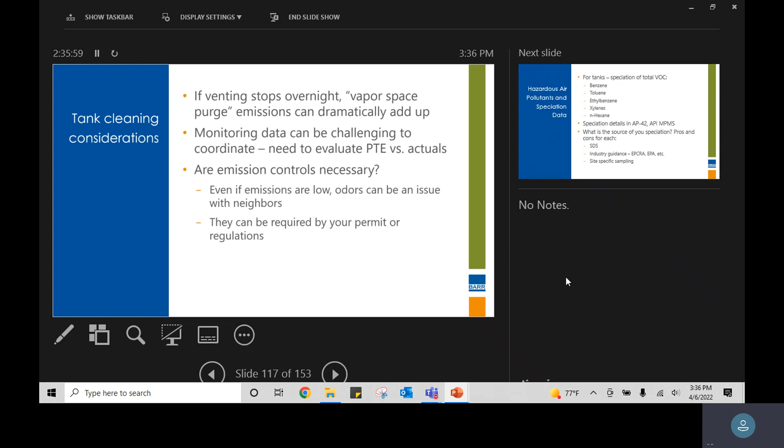We have been talking almost exclusively about VOC emissions, but the other thing to be mindful of is the hazardous air pollutant contributions from VOC. Fortunately, perhaps, all of the HAPs that we're typically concerned about from a traditional crude oil or refined product perspective are speciated from our total VOC emissions. So we at least get to calculate the VOCs, and then we don't have to recalculate everything, but rather just speciate them out of our total VOC emissions.

So we're talking BTEX emissions, hexane - these are some of the common ones. There's some speciation data in AP-42. There's a little bit more in API's MPMS documents. There's another API document that deals with refinery stream speciation profile studies. There's the refinery emission estimation protocol document. There's an EPA EPCRA industry guidance document that has a number of speciation profiles for various HAPs and other components in various petrochemical and fuels-based streams.

SDSs can be a little bit tricky sometimes because they have a range of materials, but they do certainly exist for, or they're certainly applicable for, more specific or singular chemicals. Industry guidance documents, site-specific sampling - there's certainly pros and cons to all of those for determining HAP emissions.

All right, so maybe a good continuation of our final discussion on the calculation side for tank degassing requirements. A couple points around controls necessary—requirements may vary by location in terms of required monitoring or other things. Much like all elements here, there's a little bit of your mileage may vary. It's important to understand what your permit says, what's required by your local jurisdiction, and whether or not there's anything beyond your permit that may be driving specific controls or requirements for tank degassing events.

Additionally, if you haven't already—just like roof landings several years ago, a decade ago—it's important to continue to evaluate including them in your permitting actions as part of your PTE. I think a lot of jurisdictions are continuing to look for or expect to see those tank cleaning emissions in permitting actions for tanks. I mentioned they can be a large source of emissions if uncontrolled.

However, some strategies exist that may help mitigate those emissions, like a diesel flush or distillate flush to blend down that higher vapor pressure material. As we reduce vapor pressure, we theoretically should be reducing emissions as well. That can have some interesting consequences, in that you need to certainly have enough of a diesel flush to get that emission reduction occurring. We're typically supposed to be monitoring our tank cleaning events, so we can't just on paper show a vapor pressure reduction, but ultimately we should be monitoring and having hopefully a connection between our distillate flush, and we see a lower vapor pressure, lower emissions, etc.

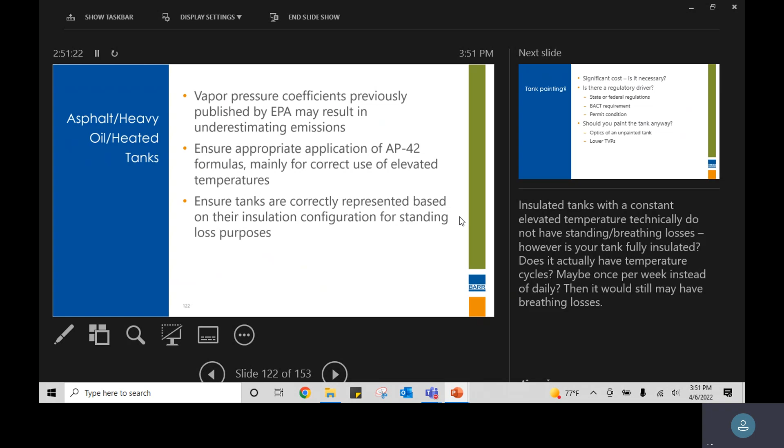One last note on insulation. Recall the calculations we looked at, there were different temperature equations for fully insulated tanks versus partially insulated tanks. It's important to have that represented correctly too, because that can influence your standing losses. If you're on the bubble of not needing a permit because your emissions are small, and you're not accounting for standing losses correctly, on top of not using good vapor pressure coefficients, that can lead to some pretty serious violation consequences.

Tank painting - talked about this a little bit up front. The federal regs don't require you to paint tanks, but several state rules do. You may have BACT requirements that drive you to paint your tanks, or local visual standards that require tank painting. An overwhelming majority of tank painting requirements are to paint the tank white, because that gives a lower solar gain, lower vapor pressure, and lower emissions. Out west, I believe there are requirements to paint tanks tan or brown to better blend in with the prairie landscape. Some refineries out in the Puget Sound area are required to paint their tanks blue or green to better integrate with the natural rainforest landscape out there. So not always white, but there can be different drivers. More commonly, if you're required to paint your tank, you're probably going to want to paint it white.

So should you paint the tank? Unpainted tanks don't often look great, so there's some optics there. Do you want nice shiny tanks with a positive image associated with you, or do you want unfinished, unpainted tanks sitting there that are working just fine? We live in a world where optics are important, in addition to the emission benefits and lower true vapor pressures.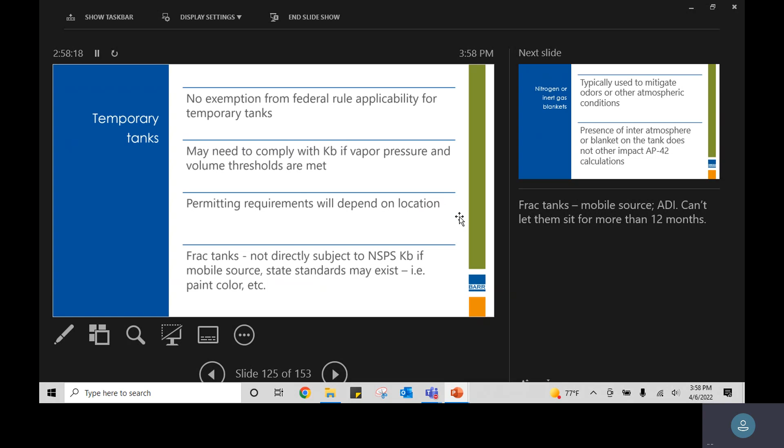Another technical application for tanks we haven't touched on too much yet, but does come up, is the nitrogen or inert gas blanket. Typically we see these on tanks storing vegetable oil, tallows, or other things used for renewable fuel production, or perhaps some very sensitive material that may be going to a very oxygen-sensitive catalyst or something like that, where we don't want oxidation or O2 contamination to occur with that stored material, to prevent it from fouling, going bad, or getting stinky.

The somewhat counterintuitive note is that the presence of an inert atmosphere or blanket on the tank does not impact the AP42 calculations. It prevents oxygen from getting into and oxidizing the stored material, but it does not directly impact or reduce emissions from a tank just because it has a blanket on it. Now, if it's a fixed roof tank and does have an inert blanket, and you've got a conservation vent or pressure vent system on the tank, you can take into account, as we saw earlier in the emission calculations, the breather vent settings, which can have emission reduction impacts. But the presence of an inert gas blanket itself - AP42 talks about the fact that that does not, in and of itself, limit or minimize emissions.

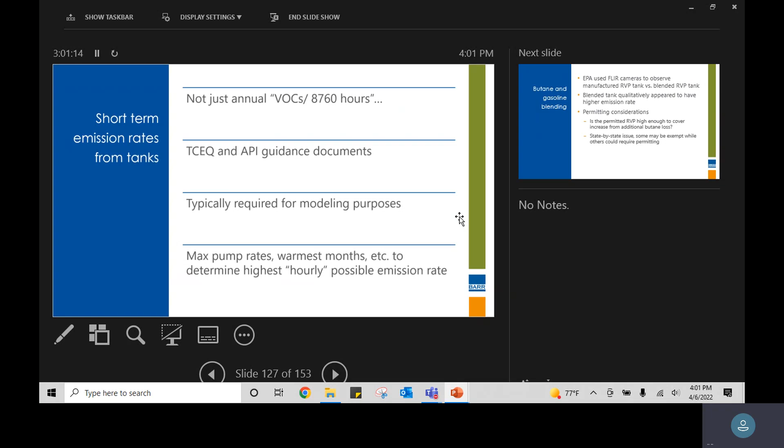Another fun, interesting one we've seen some of our clients dealing with is butane blending in gasoline. There can be instances where EPA or state regulators use FLIR cameras or general visible gas imaging to see where emissions may be coming from tanks. We had a client that had a manufactured RVP tank - they're getting RVP gasoline from a refinery, and then also blending at the terminal to get a blended RVP with butane and gasoline.

Theoretically, they should have both been RVPX, but when regulators came by and looked at the tanks - what should have been equivalent tanks, both with working rim seals and floating roofs and no other appreciable issues - there was a very significant difference in the vapor representation coming from that gas imaging. What seems to have happened is the butane blending had a higher emission rate because, for whatever reason, that blending process was not keeping the butane entrained in the gasoline, and they were probably experiencing a higher vapor pressure material in that tank than previously considered.

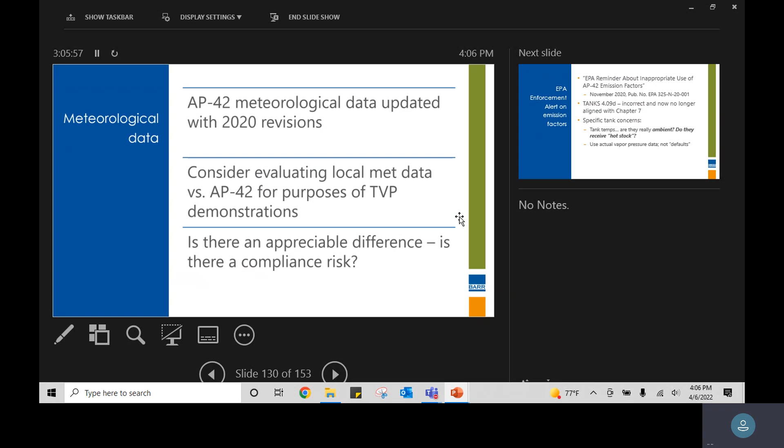So the EPA will get into our enforcement action discussion. In 2020, the EPA put out a bulletin titled 'Reminder About Inappropriate Use of AP42 Emission Factors.'

They clearly called out TANKS 4.09d as bad there, not aligned with Chapter 7. They covered a bunch of different stuff across AP42, but specifically talked about 2 key tank-related concepts we've touched on already today: are the tank temperatures really ambient, or do the tanks receive hot stock? Because those are two different situations.

You can have a tank that might occasionally equilibrate to ambient temperature, but if you're constantly receiving hot stock and it's getting multiple batches or deliveries per week or per month, you really should consider looking at what the actual tank temperature is and use measured values, or if you don't have measured data, understand what the more likely real bulk temperature profile is and use that in your emission calculations.

And then they also reiterated: use actual vapor pressure data if you have it, not the defaults. And if you are using defaults, be aware of the risk and concern in those default factors if they're incorrectly applied, or they're just bad factors to begin with.

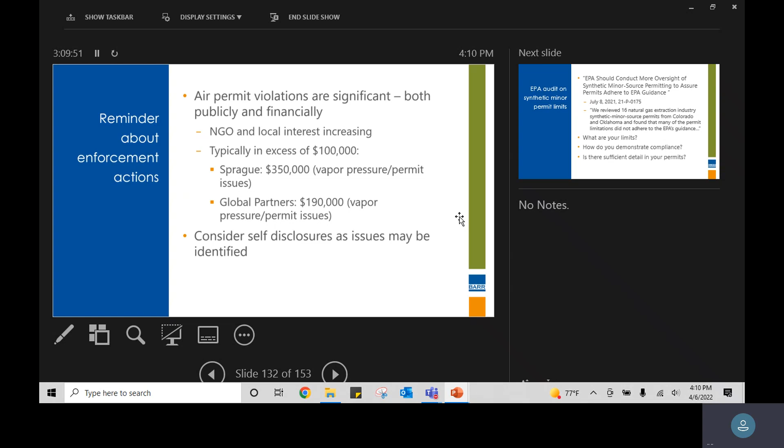The EPA continued to do some more research and digging into things. Last year, I believe, there was a guidance memo published titled 'EPA Should Conduct More Oversight of Synthetic Minor Source Permitting to Assure Permits Adhere to EPA Guidance.' This one was primarily focused on natural gas sources with specific synthetic minor permits a little west of here.

But the guidance provided a good reminder for folks to understand what their emission limits are, how they demonstrate compliance with those limits, and whether that demonstration is sufficient—either in how the permit is drafted and written, or whether there's some disconnect between how you're representing synthetic minor compliance and what the EPA may or may not be seeing in your permit.

So a little more esoteric than some of the other, more concrete topics we've touched on, but if you do have synthetic minor limits or even other non-regulatory driven limits, do the necessary stakeholders know what those limits are if they're asked? How do you demonstrate compliance with them? And is there sufficient detail and documentation in your compliance program?

So a lot of what we've talked about today has been assuming your tank is storing gasoline, ethanol, crude oil, diesel. What about the other kind of goofy stuff if you have a rag layer or a slop layer or acids or other non-hydrocarbons? There's two critical items to think about. First, do the materials form heterogeneous layers? If yes, so if you've got stratification between water and a distillate layer in a slop oil tank, a wastewater tank, or a sour water tank, you would ultimately look to use that floating layer on top as your vapor pressure and emission calculation representation. That top layer is the one with a vapor pressure representation because of that differentiation.

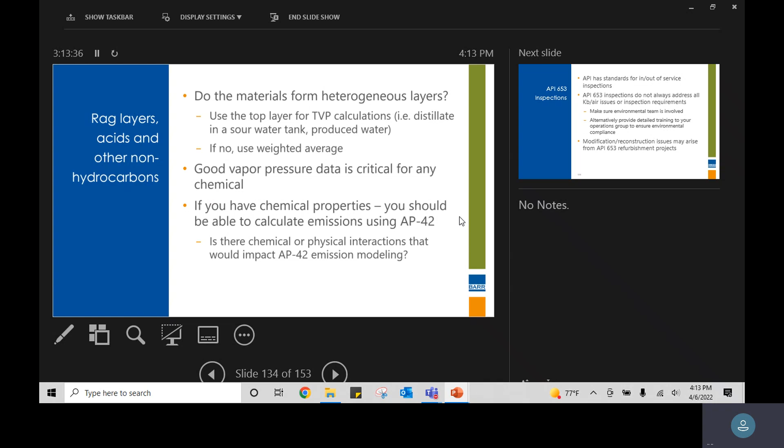So the one closing statement is to be mindful of, if you do end up finding questions coming from your engineers or other folks about what are emissions from a tank or more of a process vessel, or if there's some chemical or physical interaction happening that would not allow us to adhere to the ideal gas law basis for the AP42 calculations, you may need to step back and consider other ways you should be representing emissions from those tanks. But if you have reasonable vapor pressure and chemical and physical properties for the material, and there aren't any chemical reactions or goofy things happening, you should be able to use the AP42 equations without issue.

All right, so the last potpourri topic here, API 653 inspections. We've touched on these throughout the discussion today. There are API standards for in-service and out-of-service inspections, but the one from a tank perspective that we're most often interested in is a 653 inspection, where they take the tank out of service, doing the integrity measurements, inspections, figuring out if they have to repair stuff, patch things, etc. A lot of companies do a really good job of documenting all kinds of stuff in their API 653 inspections, but oftentimes the API 653 inspection itself isn't sufficient to capture the emptied and degassed or out of service inspection required for tanks subject to KB.

So when a tank is taken out of service and degassed, it triggers the need for that inspection. An API inspection is an inspection, and sometimes folks think that the API inspection looking at the tank, the deck fittings, the rim seals, and making sure the tank is still sound from an integrity perspective, can cover the NSPS KB requirements, but oftentimes the documentation in the report itself typically doesn't.

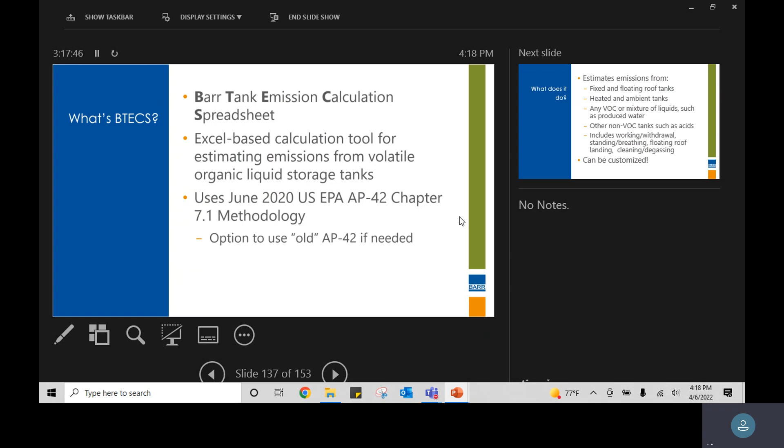It incorporates the latest AP42 calculations, and we can toggle between the old versions as well for comparative purposes. Less important today because we're well within the new AP42 requirements, but it was a helpful tool as we were assessing impacts for some of our clients.

It does all the emission calculations for fixed and floating roof, heated and ambient tanks, VOC, mixtures of liquids, and other stuff. Because it's a spreadsheet, we have the core worksheets locked down so we can't mess up the calculations. But because it's in Excel, you can add worksheets, add tables, and do all the other fun stuff to take our calculated emission data into other tables or other calculations.

The big thing we found was more helpful than some of the other software we saw was that we were able to make pretty useful and human-friendly data entry pages, so that even though we're working in a spreadsheet, it's got a pretty simple user interface for entering your tank properties.

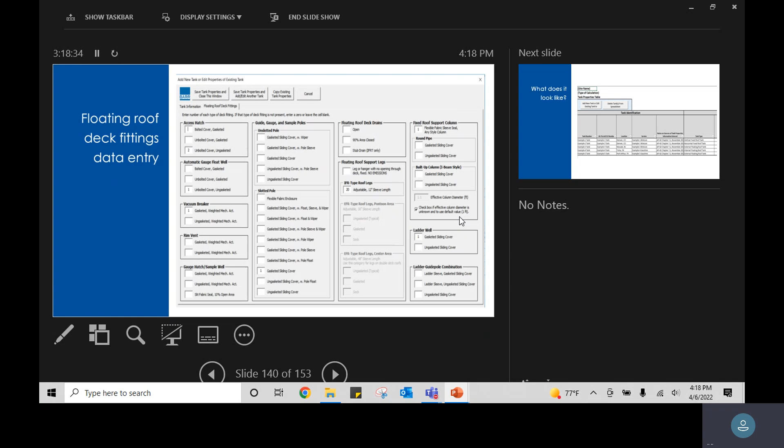Pretty straightforward entries for your deck fittings, the different categories, what type you put in, how many there are. Then you get a list of all your tanks, and it runs about a mile long because of all the different tank properties. One of the more helpful features too was for vapor pressure data.

We have our chemical profiles. You can enter in different chemicals with the physical properties, enter in your HAP components. Or if you have a complete speciation, you can calculate your emissions based on 100% speciation, sum of the partial pressures. Or if you have vapor pressure data, you can enter in the temperatures and vapor pressures and calculate constants for a second order polynomial or the Clausius-Clapeyron equation.

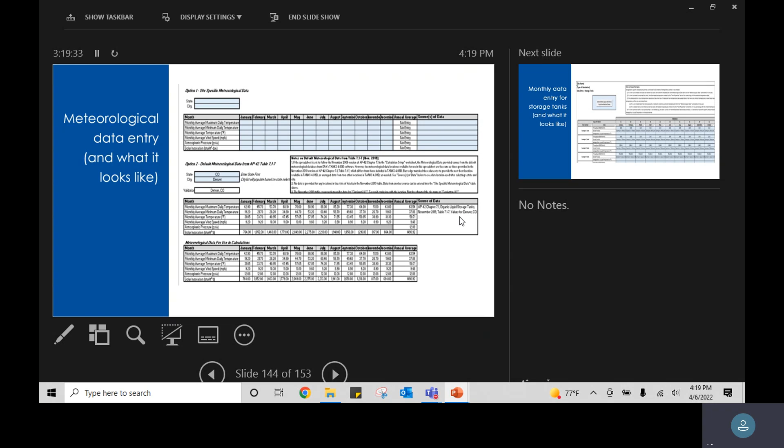Then you get a spreadsheet or table of all that data. We've got data entry for your measured or ambient temperature if you have site-specific temperature. Otherwise, you can pick your temperature database source from AP42.

Then we got a relatively straightforward data entry page that you can link up to either your Pi data or data historian for throughput and stored product stuff, and enter in specific bulk temperatures.

For landing events and refilling events, we've developed useful user forms that help walk through the process a little bit more so you make sure you're entering in your information correctly for those non-routine events. Same thing for tank cleanings.

We can indicate how many days the tank was cleaned, whether there were vapor space purges, what was the height of the liquid, what was the bottom type, what was our flow rate, concentration, so on and so forth.

So what about reports? TANKS 4.09, for as challenging of a tool as it was, it did have a good, friendly, human readable report that everybody was familiar with and got the job done.

We've created similar tables in BTECS that you can print out similar style reports that have all the intermediate calculations. We also can do the API or TCEQ based hourly emission calculations, and of course we have the non-routine events and routine events and all the intermediate calculations.

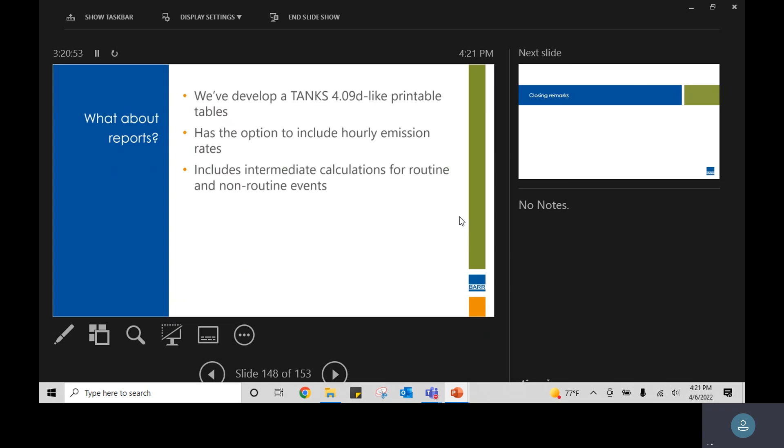Key takeaways: deck fittings, tank properties in general, pay attention to the details, have good documentation for what you have and why you have it or why you need it.

If you aren't subject to KB, consider your modification and reconstruction analysis anytime work is done on a tank. We've talked about modification a number of times - it's when you have an increase in emission rate on a kilogram per hour basis as defined by NSPS Subpart A. Reconstruction can also happen if a tank's roof has gone on too long and is like Swiss cheese, requiring a new roof, and that replacement cost can be substantial - you could end up reconstructing the tank. Same thing with a floor corroding and needing replacement, which can easily exceed 50% of the fixed capital cost for your reconstruction analysis. So if you're not subject to KB, and that's a critical regulation for your tanks, be advised there could be issues when you go through these projects.

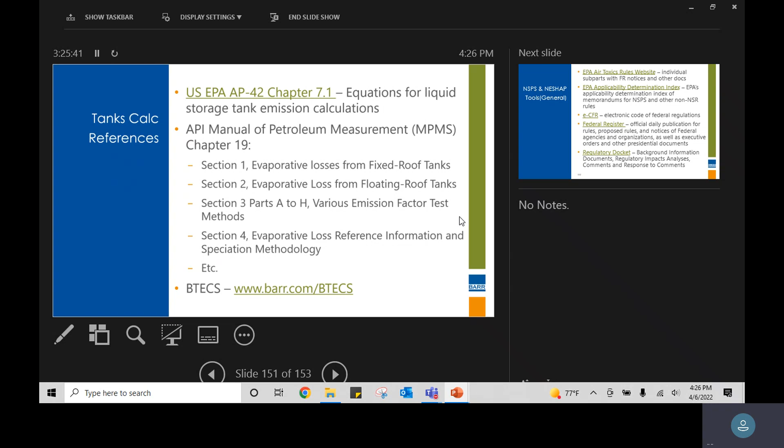Or if you want to go down a rabbit hole and spend all the money your organization doesn't have, you could learn how to test for your own site-specific emission factors. I don't think anybody's ever bit on that, but that's where that methodology exists and where you can find more information on it. There's a number of other Chapter 19 sections that deal with various parts and pieces of the tank program, emission calculation, and design, but those are the relevant ones. We're talking about calculation tools - if you don't have something useful, that is an available resource. Happy to talk more about that as well.

There's a handful of EPA resources I'm sure we're all familiar with - the EPA Technology Transfer Network website, the ADI, Applicability Determination Index. I think the EPA typically publishes these in batches a couple times a year. There's a couple of good ones around reconstruction and modification for storage tanks, and some about taking a tank out of service and the drain to puddles versus what it means to be in or out of service. The eCFR has had a pleasant facelift the last few months, making it a little easier to read and engage with.